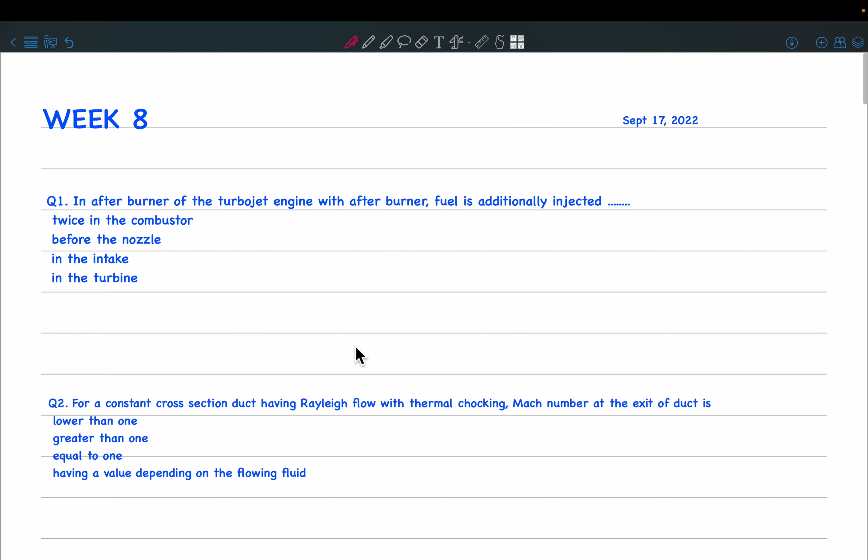The first question is on the afterburner in a turbojet engine. The fuel is additionally injected, but is it injected twice in the combustor, or before the nozzle, or in the intake, or in the turbine? So do you know where the afterburner is placed exactly in the turbojet engine?

So you must have seen the schematic of a turbojet engine. What is the first component? There is the air inlet, and before the compressor you have this diffuser, where the area is expanding, so that acts like a diffuser. Then this is the compressor, then you have a combustion chamber, and then you have a turbine. The turbine and compressor are connected to each other, so the turbine runs the compressor, and then you have a nozzle.

Now sometimes what we have before the nozzle is an afterburner, which is essentially a region where combustion occurs. So over here you will have an afterburner. The answer to this question is: before the nozzle.

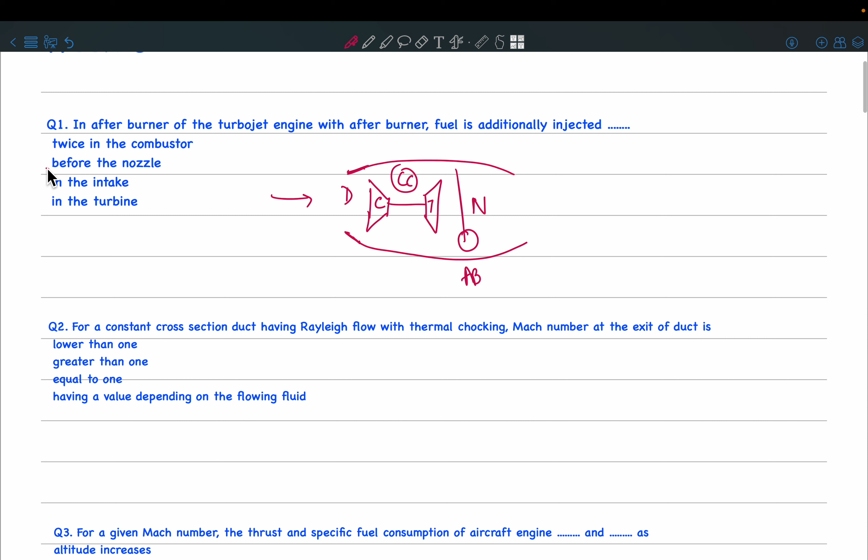So the next question is: for a constant cross section duct having Rayleigh flow with thermal choking, what is the Mach number at the exit of the duct? What is the key word here in the question? Choking. Last session we discussed what choking is. So what is the answer here?

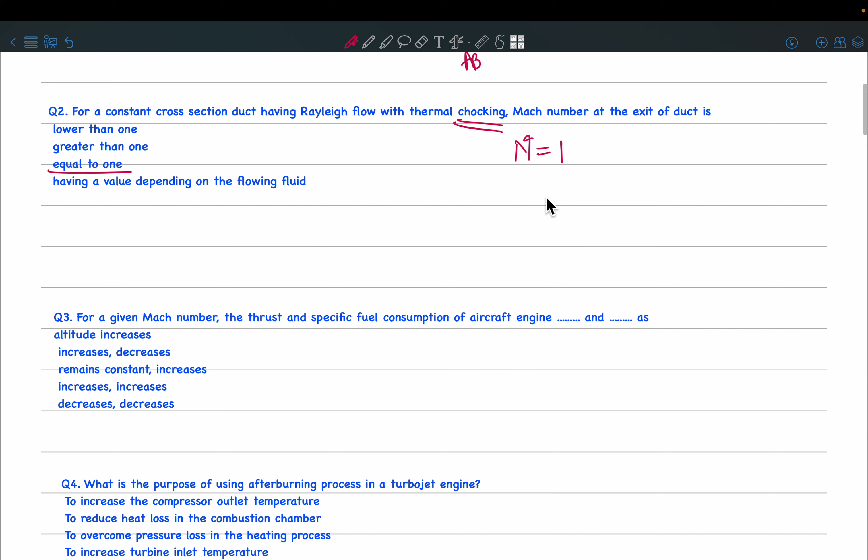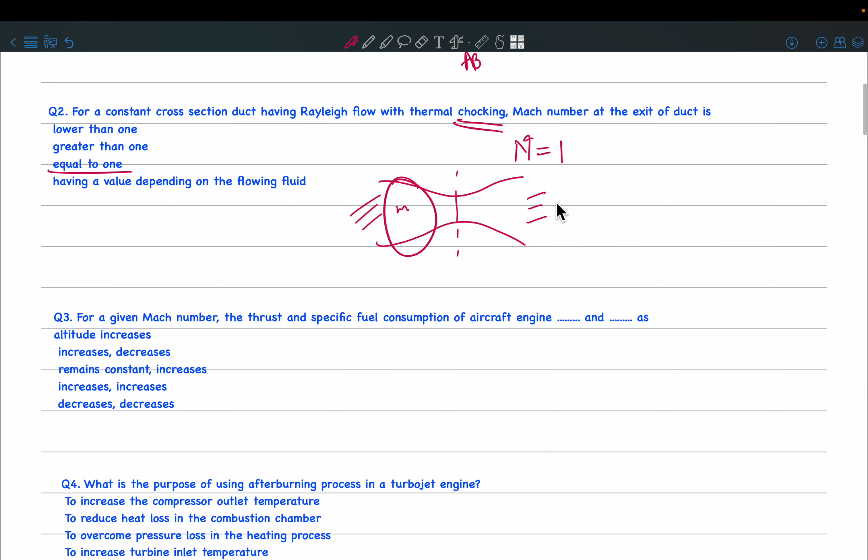Last time we discussed that choking is nothing but when the Mach number in the throat of a nozzle or in a duct reaches 1. So here the answer is equal to 1. And what happens when Mach number reaches 1? Say for example you have this nozzle and at the throat Mach 1 is achieved, then whatever changes you are making in the upstream flow will not reflect in the downstream flow. So even if you change the mass flow rate here, only the pressure in the upstream flow is going to change, but the pressure downstream will not change.

The next question is: for a given Mach number, does the thrust and specific fuel consumption of an aircraft engine increase or decrease with altitude? So there are two questions here, one regarding thrust and the other regarding specific fuel consumption. Remember we had this plot last time. This is your thrust, and on the x-axis you have altitude. Can you tell me how this is going to vary?

Am I still audible? Okay, so how is this going to vary?

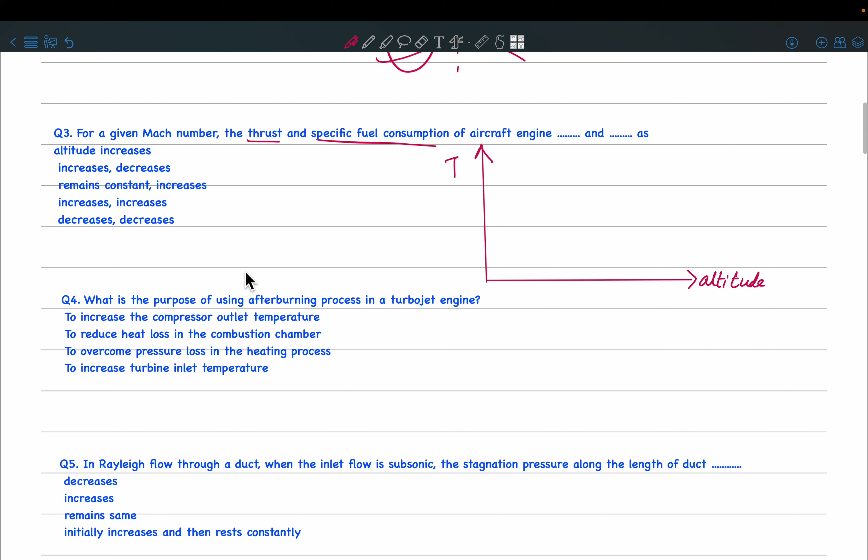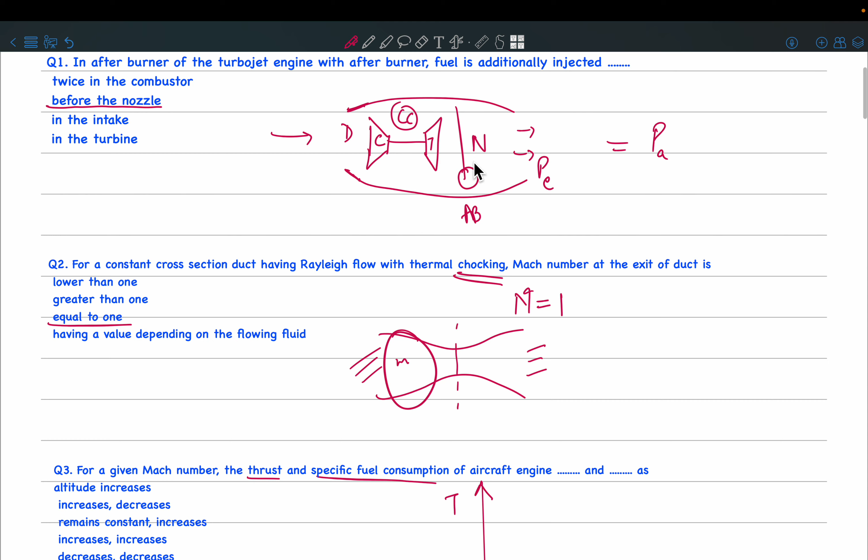So how is a turbojet supposed to function? It should ideally give you as much thrust as possible. Remember last time we discussed that the turbojet produces maximum thrust when the exit pressure PE equals the atmospheric pressure PA. If there is any difference between these two pressures, your turbojet is not functioning at full capacity. So what happens as you increase altitude? Say you designed your turbojet engine for sea level atmospheric pressure. Now as you increase the altitude, the atmospheric pressure reduces. So since you optimized for sea level, if you fly at higher altitudes, the thrust is simply going to decrease. Does that make sense?

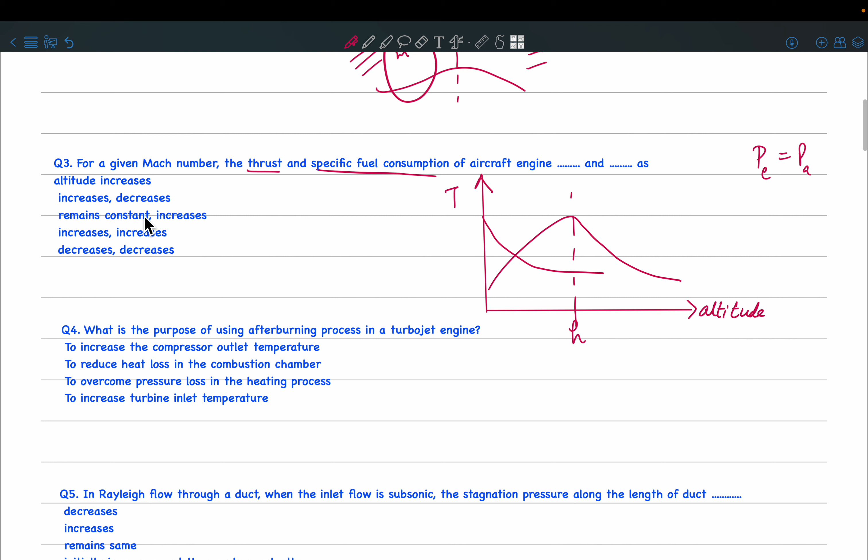So thrust is going to increase and then decrease, but the specific fuel consumption will keep decreasing. So the answer here is increases and decreases. This question is kind of ambiguous, so I would rather just explain this graph than give you any of these options, because the question needs to be more specific about where the aircraft is actually optimized for operation.

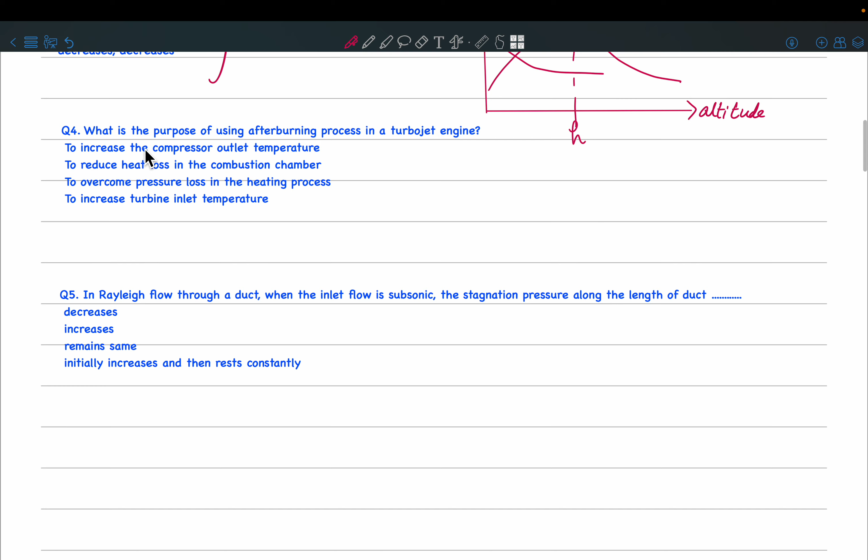Moving on to the next question: what is the purpose of using the afterburning process in a turbojet engine? Why do we use an afterburner? Like I said in the previous question, the afterburner is added just after the turbine and just before the nozzle. Now what is the work of a nozzle? What does the nozzle do?

It increases the kinetic energy, it decreases the pressure. So now if the nozzle has to increase the kinetic energy, how does it achieve that? We know that the velocity at the end of the nozzle actually depends on the turbine outlet temperature. So after the turbine, if you have very high temperature, then there will be a lot of thermal energy in the fluid, and that you can convert to kinetic energy, right?

But what happens in a turbine? If you go back to your turbojet cycle, in the compressor and in the combustion chamber the temperature is rising in the TS plot, but in the turbine there is a drop in the temperature, right? So what we do is we add an afterburner so that you can further increase the temperature to much higher values. As a result, the expansion in the nozzle will be much larger, and that will lead to much more increase in the kinetic energy.

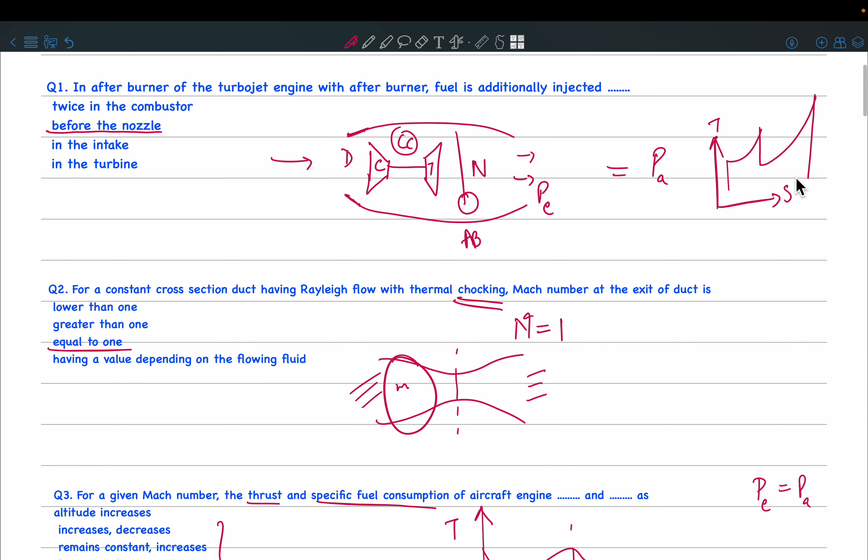So what is the answer over here? The purpose of using an afterburner is to increase the turbine inlet temperature. Is this clear?

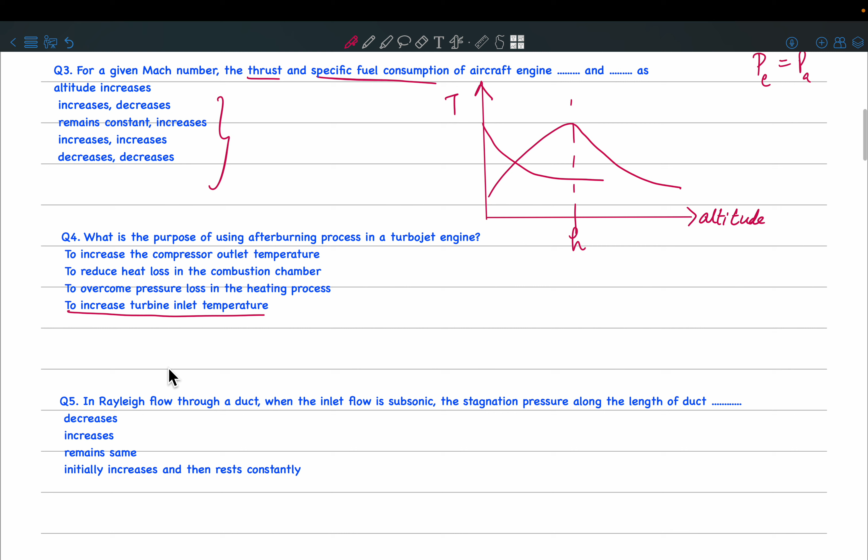Now in Rayleigh flow through a duct, when the inlet flow is subsonic, what happens to the stagnation pressure along the length of the duct? What is a Rayleigh flow?

You must have seen the lectures, right? So what is a Rayleigh flow? Do you know the SFEE equation, the energy conservation equation?

It's constant area, frictionless flow. What else? What else? Yes, exactly. So we assume that the duct is frictionless, and you can assume it to be constant area or variable area, but the main thing is we account for heat addition or heat rejection. This basically says, like in the combustion chamber, if you just assume that this combustor is like a duct where combustion is happening, so you are allowing for heat addition in your energy conservation equations.

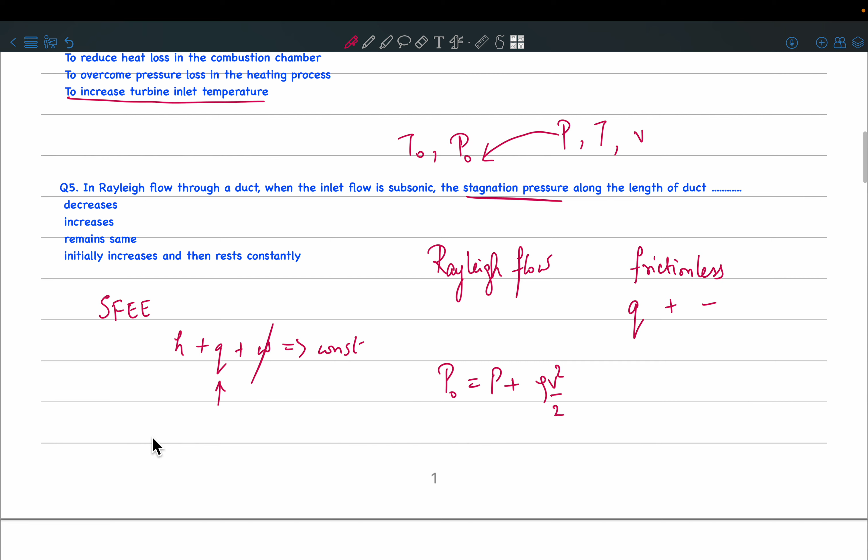So now the question is, how does the stagnation pressure change? Always remember that the stagnation pressure will change whenever there is any heat addition or whenever there are losses due to friction. If you remember, let me just add a page over here.

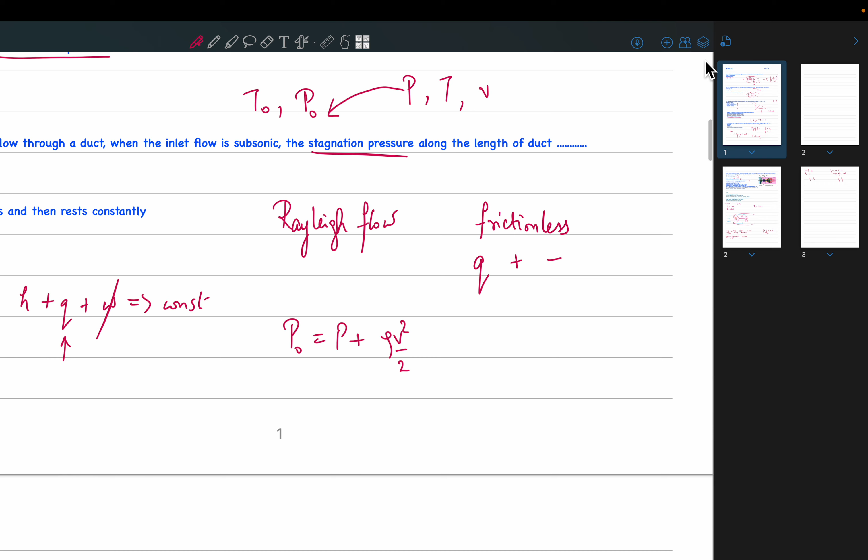If you remember the TS diagram of your turbojet engine again, what we draw here in the TS diagram, we draw these constant pressure lines, isn't it? But these are constant static pressure lines. So you start, this is say P1 and this is your P2. In the compressor, your static pressure increases like this, and then in the combustion chamber it remains at P2 because you assume constant pressure heat addition, and then in the turbine again there is going to be a decrease in the static pressure.

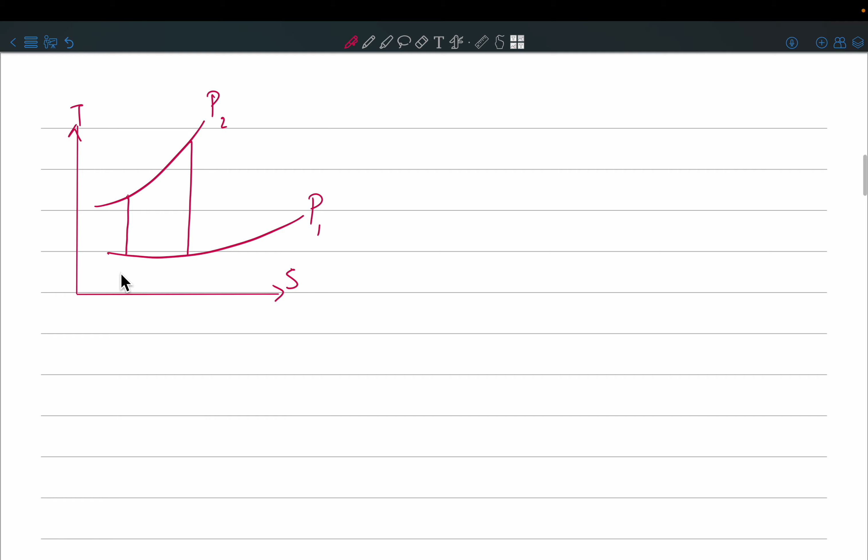And then before the compressor you essentially have a diffuser. In the diffuser also we say that the static pressure is increasing, and in the nozzle we have the static pressure decreasing, right? But now if I ask you what happens to the...

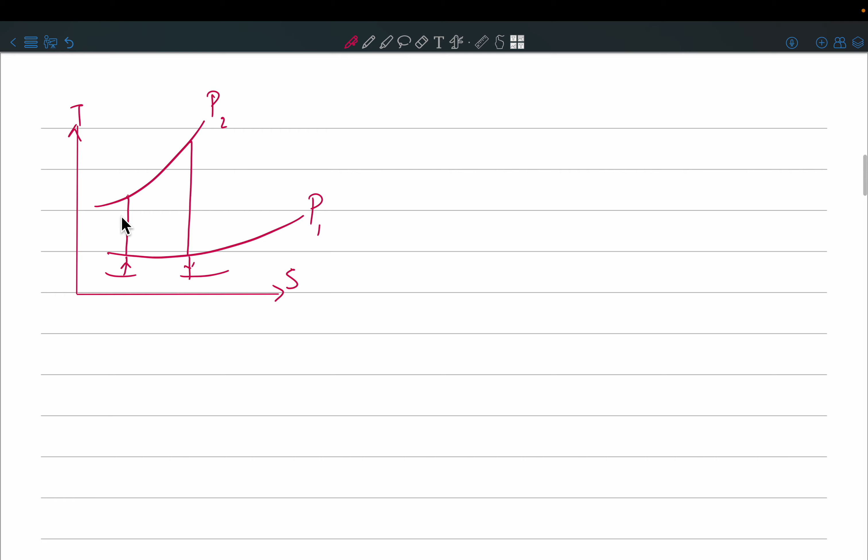Stagnation pressure, so if for example I drew this TS diagram, but instead of drawing the constant pressure lines, if I draw the constant stagnation pressure lines, can you tell me what is going to happen? Say this is the stagnation pressure P naught 1. I have started from atmospheric pressure, which is essentially the stagnation pressure. What happens in the diffuser? How does the stagnation pressure change?

It is almost constant, it remains the same, because in the diffuser you don't have any work added, there's no turbo machinery over there, and of course we are assuming there's no heat loss or anything, so the stagnation pressure is going to remain the same.

So let me number this for reference. Let us say there was this inlet, after inlet up to the inlet of compressor it is 1, then you have 2, then this is 3, 4, and exit. Here inlet and 1 are essentially the same point, because I have considered the stagnation pressure lines over here. What happens if I go from 1 to 2?

Will the stagnation pressure jump or will it remain same in a compressor? So what are you doing in a compressor? We are doing work and there is turbo machinery involved, right? So you are adding work to the fluid, so the stagnation pressure is going to increase. Is that clear?

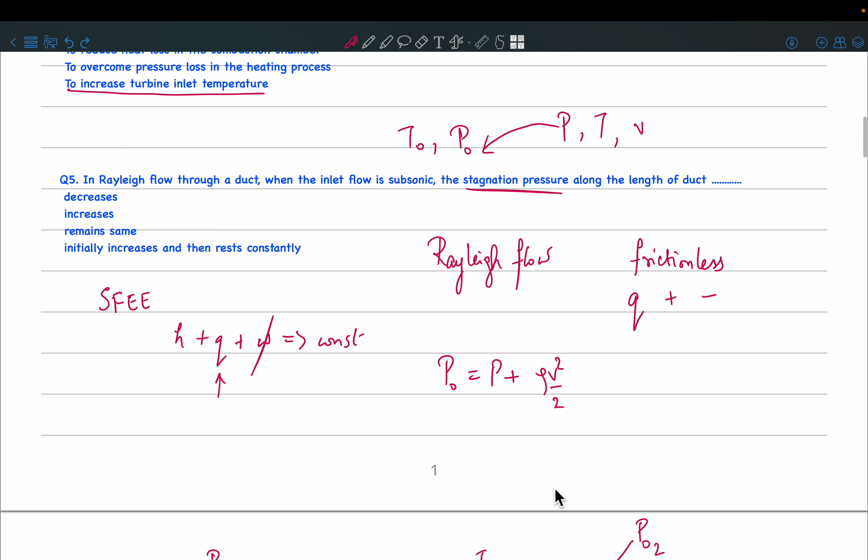Stagnation temperature increases. So what? Why will the stagnation pressure decrease? Mach number increases. In a combustion chamber, we assume almost constant velocity. Isn't it?

Then why would the stagnation pressure change in Rayleigh flow? So you are adding heat, okay, but understand that in the combustion chamber or in a simple duct, if you are adding heat, you are changing the temperature conditions. You are adding energy which goes in raising the temperature. So your stagnation temperature will increase, but you will have losses, and that is why the stagnation pressure is supposed to decrease.

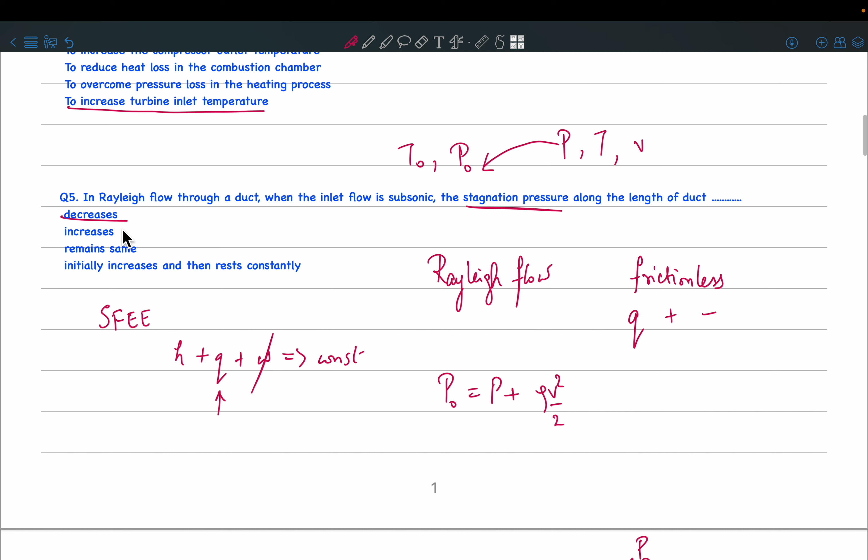So this is actually not intuitive, because you will say that I am adding heat, so if I am adding heat, the energy should increase, so the stagnation pressure should have increased. But instead what you see is that the stagnation pressure is going to decrease. Is this clear? Where does the heat that you have added go? It goes in increasing the stagnation temperature.

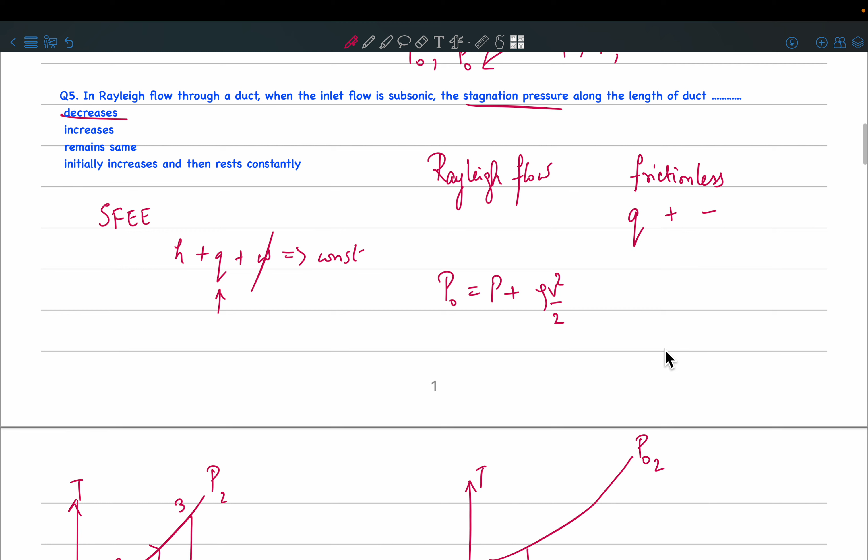Is that clear? Should I move on? Okay.

Okay, so now we'll move on to the big numerical for today. So here I have a twin spool turbo fan engine, for which the parameters are given, that is the bypass ratio and overall pressure ratio, everything is given to you. In this fan, the fan is driven by a low pressure turbine, the compressor is driven by a high pressure turbine.

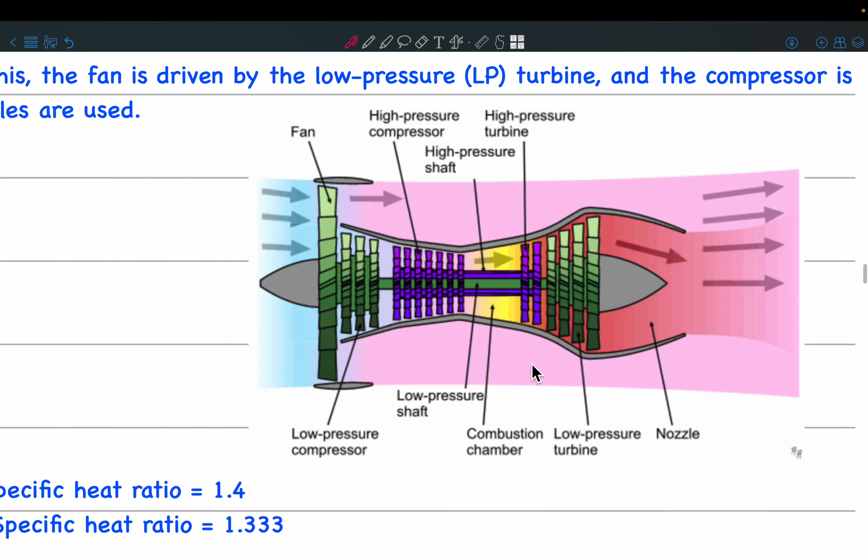Okay, so now what are we given? We are given the overall pressure ratio, fan pressure ratio, bypass ratio, and the maximum temperature that is achieved, that is the turbine inlet temperature, which is essentially defined by the material of your aircraft, right? So you are also given the polytropic efficiency, isentropic efficiency for all the components, and mechanical efficiency of the spool.

So what is mechanical efficiency? Now while transferring the work from the turbine to the compressor, the efficiency of the spool is going to come into play. So this is nothing but the transmission efficiency. Okay, yeah, any questions?

Okay, so combustion pressure loss - here we are assuming that some amount of pressure is lost in the combustion chamber, and then total air mass flow is given to you, fuel air ratio is given to you. Now what is total air mass flow?

Remember, in a turbofan engine, you are going to take in some air. Some of that air will simply flow from the outside, that is as a cold flow, and some of it will pass through the core of the engine, and that will come out as a hot flow. So we have a cold flow over here, m dot c, and over here we have a hot flow, m dot h, which is going through this entire core. And what is given to you is the total air mass flow rate that you are taking in over here, so this is m dot total which is given.

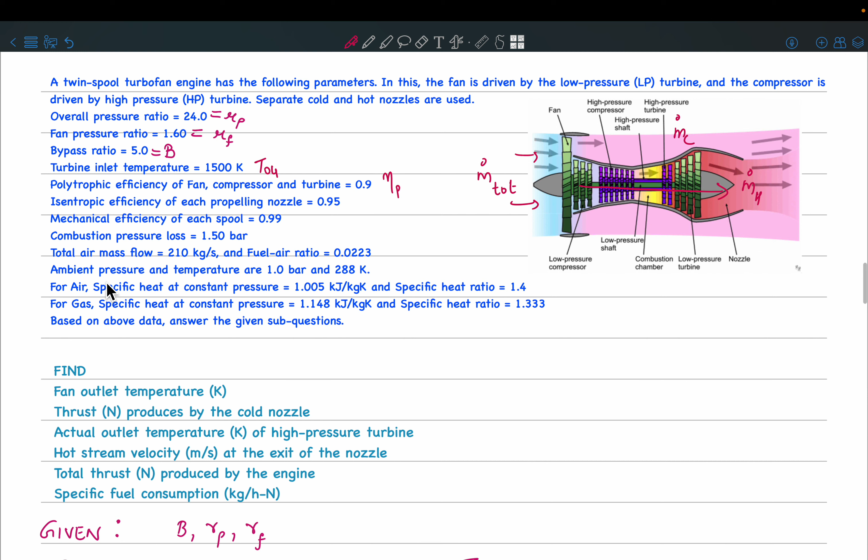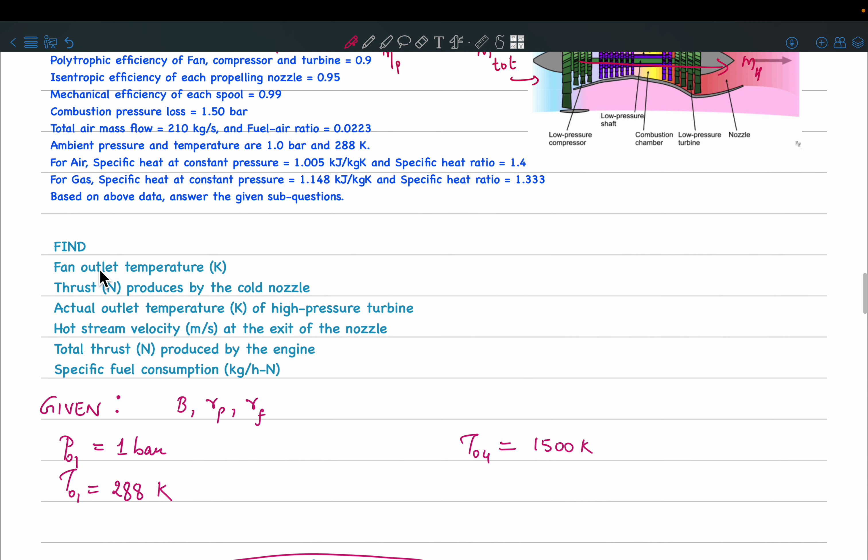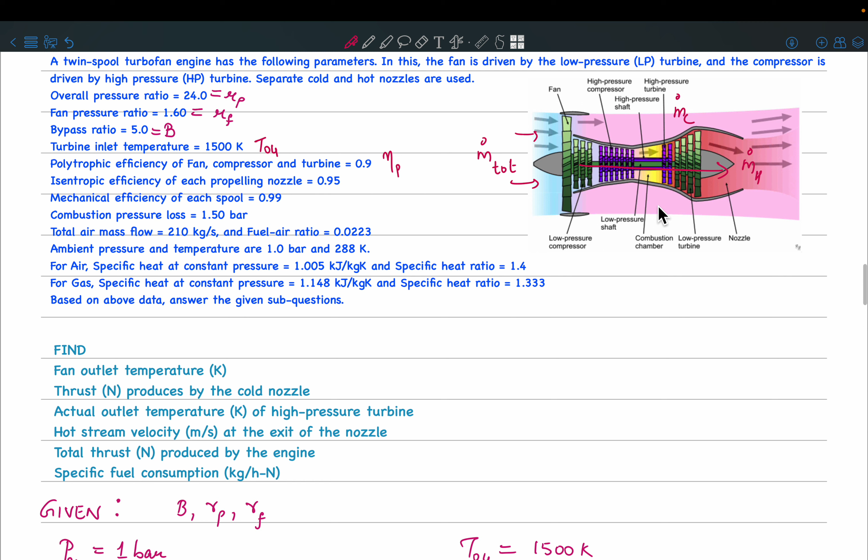Okay, then the ambient pressure and temperature are given, and so Cp and gamma for air and gas are given. So now we are asked to find certain quantities like thrust and the fan outlet temperature and so on. So what we have to do is basically solve the entire cycle for this turbofan engine. Okay, so yeah, I've just made a schematic here, as you can see.

So there is cold flow m dot c and a hot flow m dot h. I hope this much is very clear. What is the bypass ratio definition? What is bypass ratio defined as?

Yes, that's right. Okay, and usually this turns out to be, in practical turbofan engine, it is in the range of 8 to 12. Okay, so here what we are given, bypass ratio is 5. So this is a small turbofan engine, in some sense.

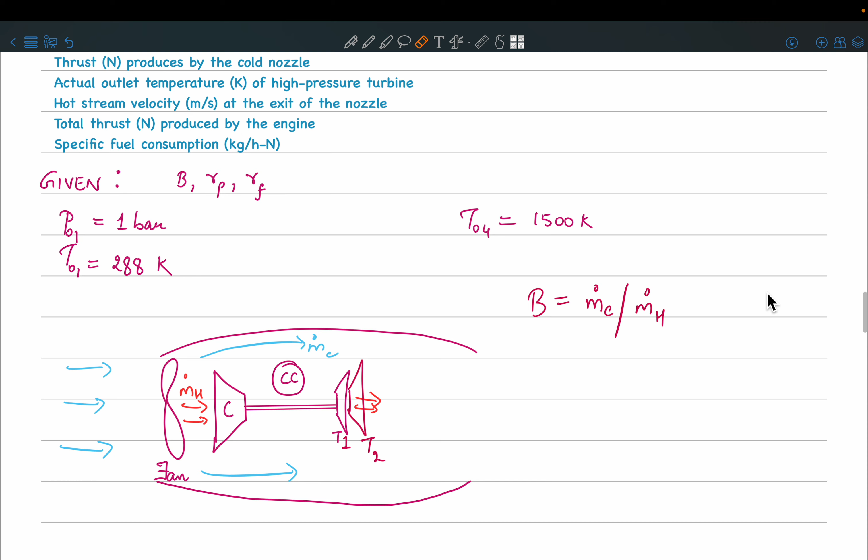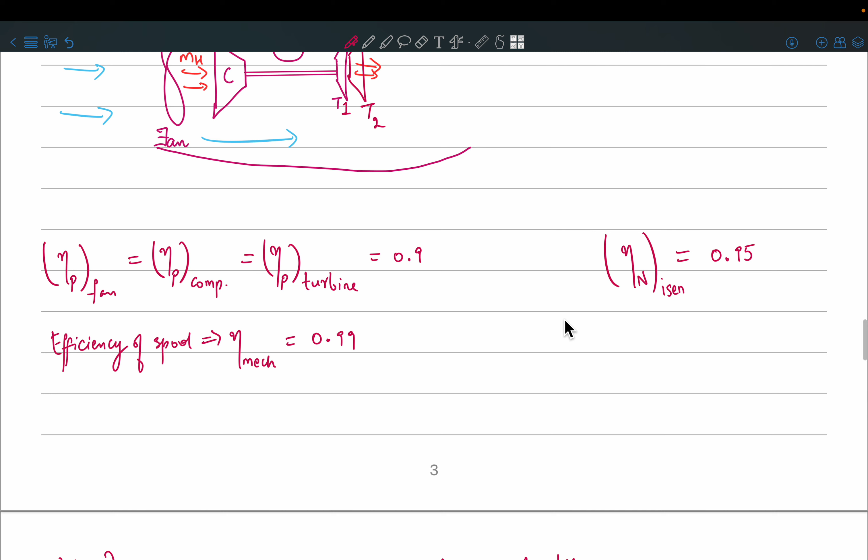Okay, so again I have written these quantities, that is the polytropic efficiency of the fan, compressor and turbine is given, isentropic efficiency of the nozzle is given, and the efficiency of the spool is given. Now we are given two different things, Cpa and gamma A, that is the specific heat and the gamma value for air, and similarly for gas.

So in the cold flow, the inlet is essentially just air and the cold flow is just air, so for the cold flow we will use the air values. And in the hot flow, till the fluid moves through the compressor, it is just air, but in the combustion chamber we add fuel, right? So only after the fluid has come out of the combustion chamber, that is in the turbine and the nozzle, we will use the values for Cp and gamma for the gas. So where to use Cp air and where to use Cp gas, is this part clear?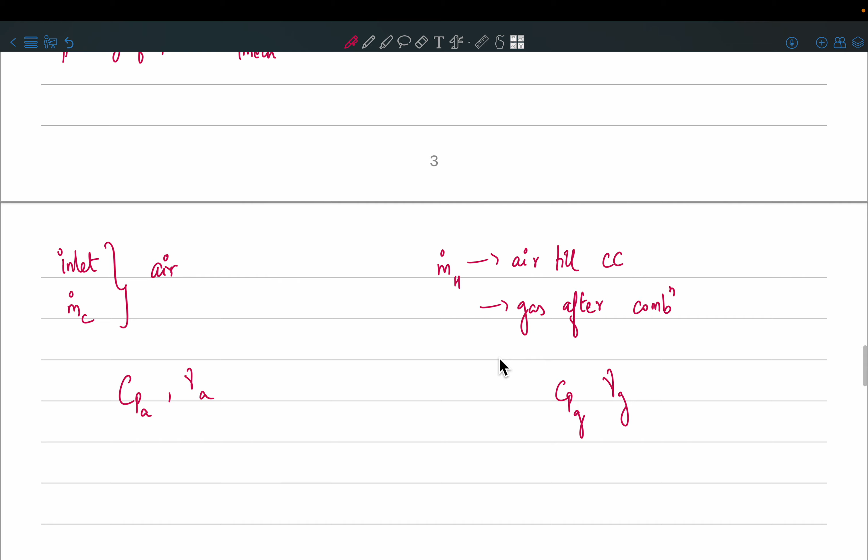So for compression, what is the equation for relating the compressor efficiency and the polytropic efficiency? This you must have seen in the lecture actually. I'll just write down the equation - if there's any doubt about the derivation, you can let me know, I'll clear it in the next session. Okay, so this is for a compressor.

You have eta c minus 1 by eta c, essentially 1 by eta poly, so eta p of the compressor, into gamma minus 1 by gamma. Okay, so if you just plug in the values here, which gamma will you use? Because we are dealing with the compressor, it has to be gamma air. So this is, so you are given the polytropic efficiency, right? So this turns out to be 0.31746. So this definition I hope you all are aware of.

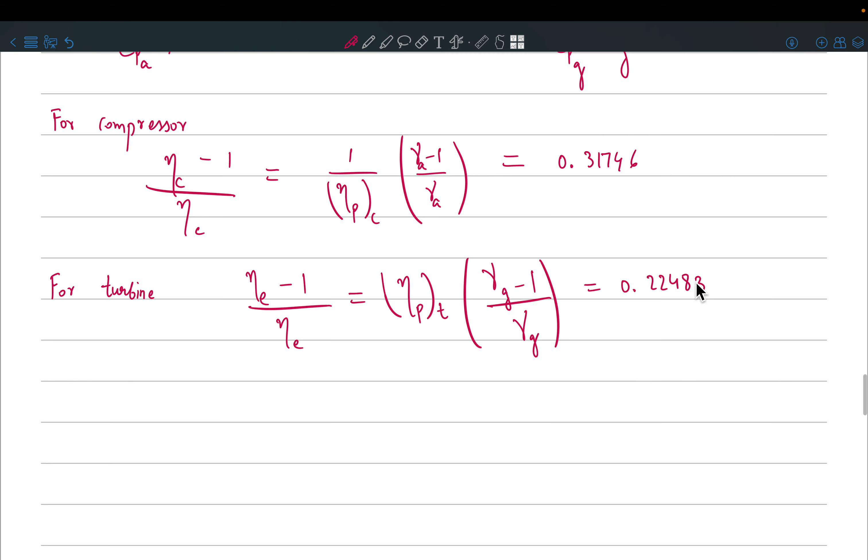Okay, then the next thing is, if I just draw the TS diagram again, I'm going to use the isobaric lines where I have the constant pressure, static pressure. Okay, so how will the flow look on this TS diagram if I consider only the flow across the fan? Okay, so you have the inlet to the fan. So basically I am drawing the TS diagram for the cold flow, that's all. So you start from this PATM. So help me out with this diagram, come on. What will the fan do? Will the pressure, static pressure increase?

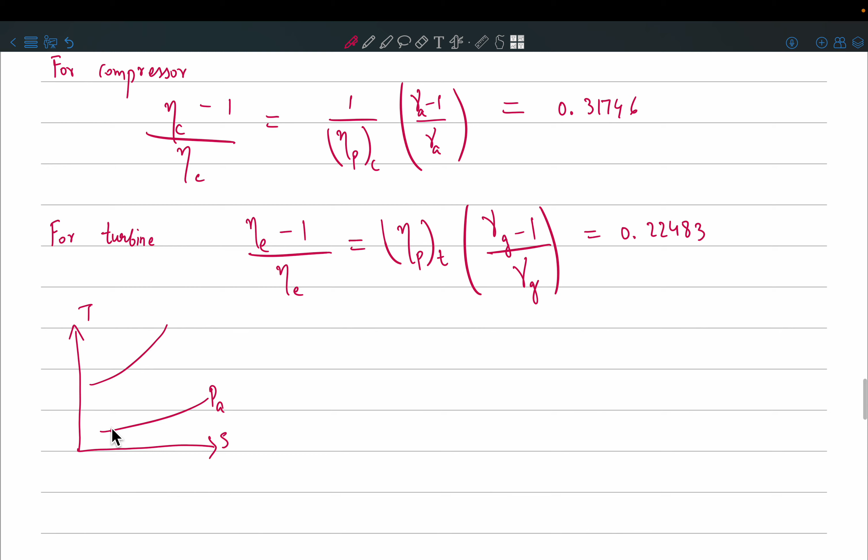Static pressure is going to increase over here. Okay, go back to the diagram. You have this cold flow, and it doesn't have to go through any turbo machinery, but remember it is going to come out of the nozzle. So the cold flow also has a nozzle over here. This is the cold flow going, and this part you can assume is like a nozzle.

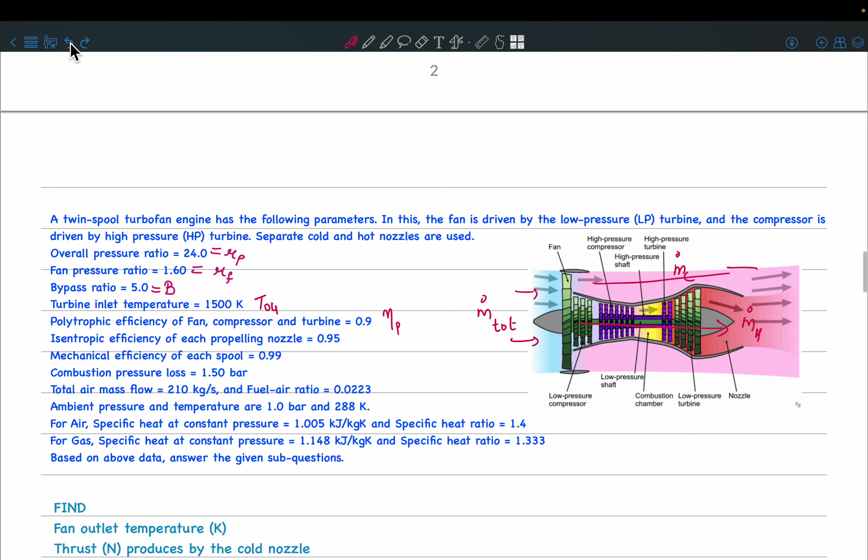So now maybe you can tell on the TS diagram. This was from the inlet, and then you went across the fan, then from the fan into the nozzle. Now how will that affect the TS flow? You are going to expand into the atmosphere, and since you didn't undergo any combustion, there is no change in temperature. So simply you will draw a line right on top of this coming down back. That is the exit. So this is essentially what we have to calculate.

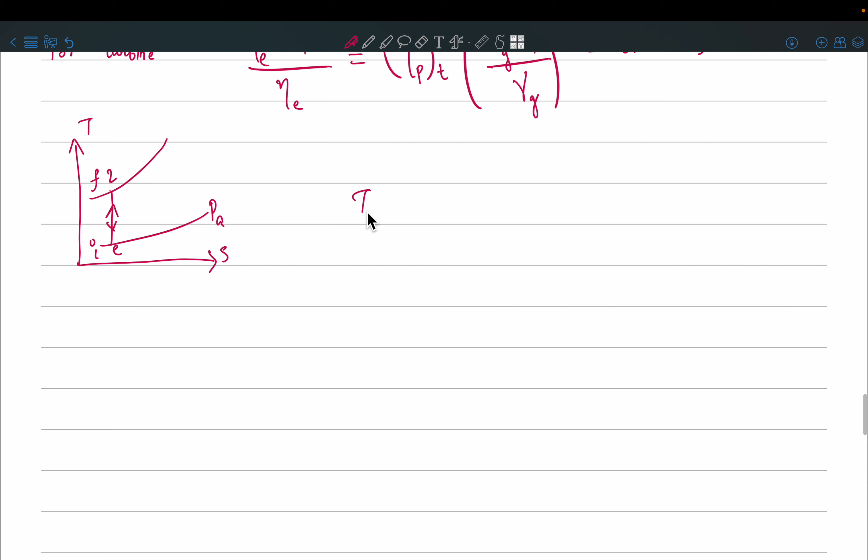So first, from the inlet across the fan, we have to calculate the temperature. I can call this state 2. So what is the outlet temperature after the fan? How can we find that? We can use isentropic relations. So T naught 2 by T naught 1 is equal to P naught 2 by P naught 1, whole to the power of gamma minus 1 by gamma. Is this clear?

And this pressure ratio is going to be the fan ratio which is given to you. So you can find the T naught 2 temperature and tell me. T naught 1 is known, so please just calculate and tell me the value. Okay, so the answer I've got is 334.34 Kelvin. Yeah, pretty close.

Okay, then the next thing we have to calculate is P naught 2. So we have T naught 2 to calculate P naught 2, which obviously you know because P naught 1 is given and you know the fan ratio. So P naught 2 by P naught 1 is 1.6 and P naught 1 is 1 bar. So of course P naught 2 is 1.6 bar.

Now why do we need to check this P naught 2 value? Remember, if the nozzle is choked or whether the exit pressure is more than or less than the atmospheric pressure, that is going to basically define whether there is choking or not. So we have to check if this pressure ratio is more than or less than the critical pressure ratio, so we have to compare it with P naught 2 by P naught 1 critical. Last time we discussed what is the definition of P naught 2 by P naught 1 critical. That will depend on, what does it depend on? What are the main parameters that define your critical pressure ratio?

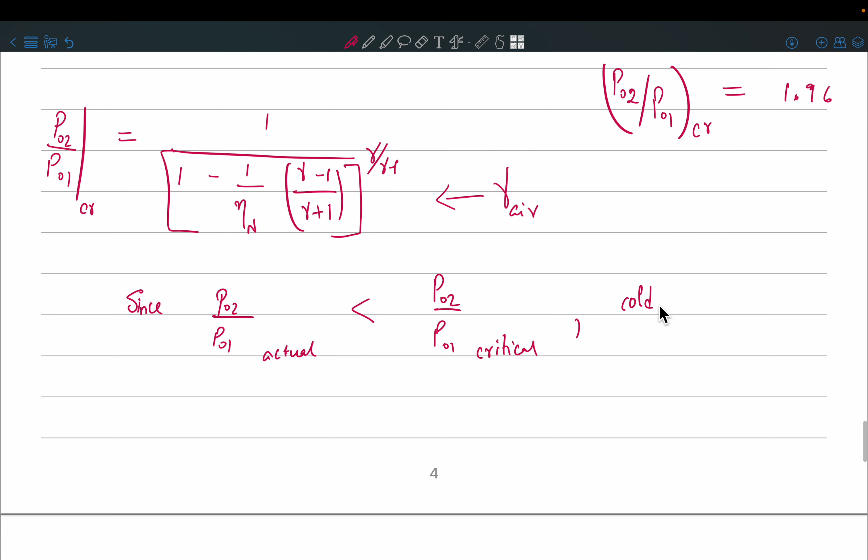So I'll just write that down here. Since P naught 2 by P naught 1 actual is less than P naught 2 by P naught 1 critical, we can say that the cold flow nozzle is not choked.

Then let us next solve for the nozzle temperature drop. So what is the temperature drop in the nozzle? I hope this is clear. There will be a temperature drop in the nozzle, so that is very clear in the TS diagram. So you are going to come from 2 to E. So let us see in the nozzle what happens.

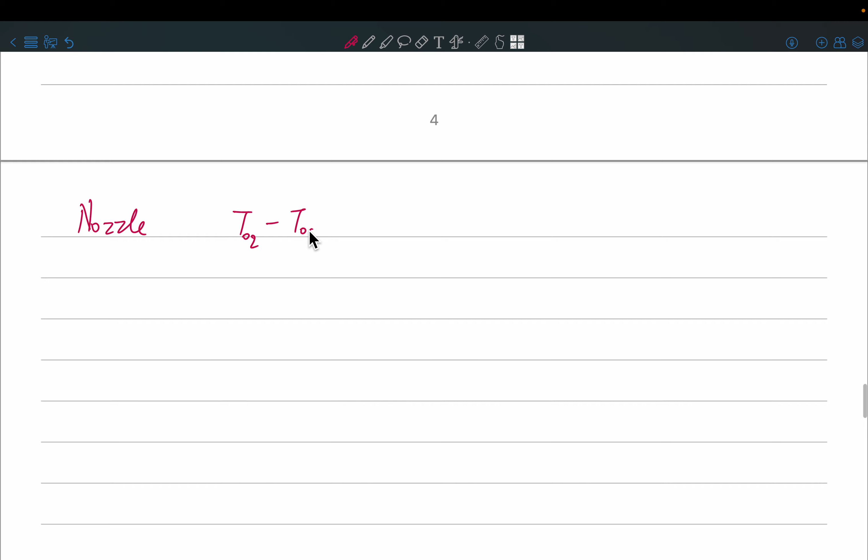The stations can be demarcated once, just for clarity. So let us say this is 2 and the exit is basically, I'm numbering it as 8, or you can just call it E, exit. So for the nozzle, the temperature drop is going to be T02 minus T08, sorry, T8. So how, before I give the answer, how are we going to get this value T8? We just have to get the temperature at the exit of the nozzle. So how do you get that?

Yeah, come on, we've done this several times. By isentropic relation, what will we get? We know that P02 by P01, right? So from there you get T02 by T01, that is the isentropic relation you have used. So now what can you do? How are you going to get T8? What happens to the stagnation temperature in the nozzle? That is the first question.

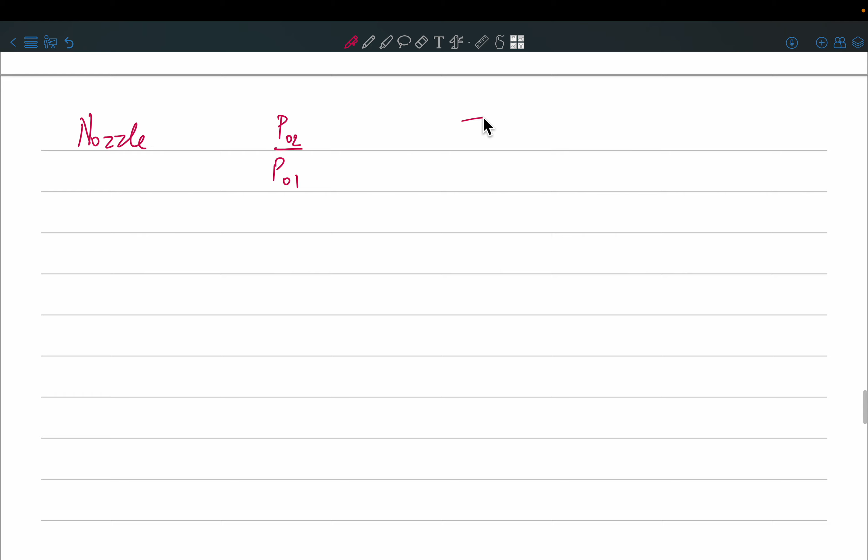What happens to stagnation temperature? Can I say T02 is equal to T0E? Can I say this? So in a nozzle you are not having any turbo machinery again, so the stagnation pressure and the stagnation temperature will remain the same, right?

Okay, so we are going to use the definition of nozzle efficiency. How is nozzle efficiency defined? What is the definition of nozzle efficiency? You remember that if you are coming, this is your real path, but ideally you should have come isentropically. So you will say actual temperature drop by ideal temperature drop. That's how you define nozzle efficiency, right?

I'll just write over here, actual delta T by ideal delta T. So basically using this definition I can get T02 minus T8 is equal to eta nozzle into T02, 1 minus T01 by T02. So that further you can get from the pressure ratio because you know it. So that is going to be 1 by the pressure ratio of the fan to the power gamma minus 1 by gamma, and gamma you will use for air, so this is gamma air.

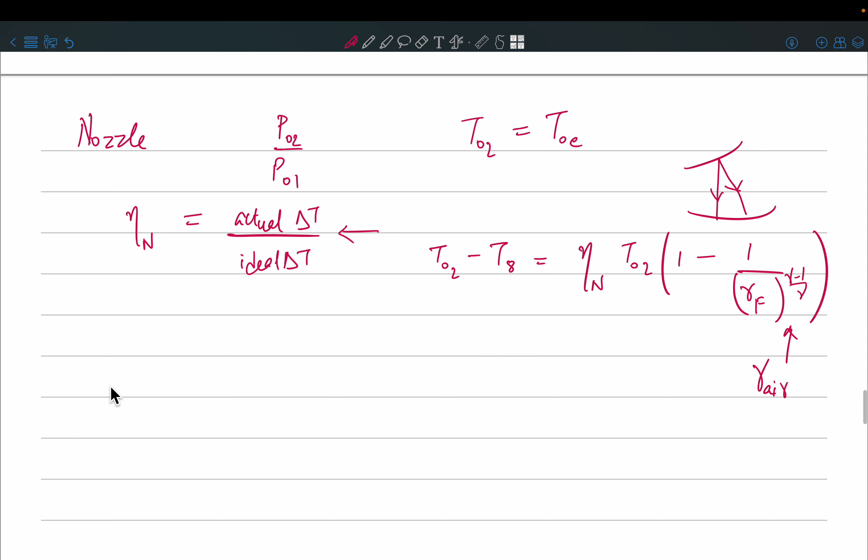Okay, now using this simple relation you will get the value of T8. Did you understand what we have done over here? We have just used the nozzle efficiency, and then the temperature ratio we have got from the pressure ratio. So the value of T8, can you evaluate and tell me the value of T8?

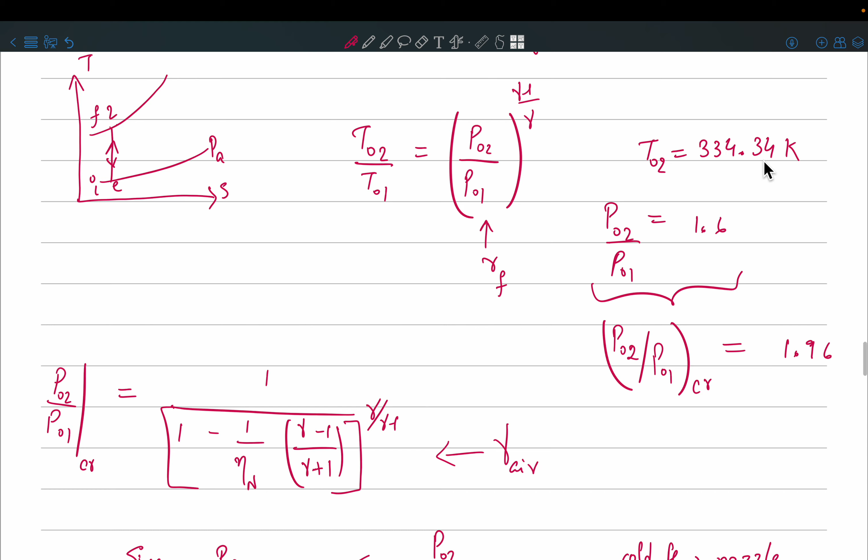So first you can evaluate T02 minus T8, that turns out to be 39.91 Kelvin. T02 was known to us, which is 334.34 Kelvin. So you can get T8 is 334.34 minus 39.9. Am I still audible? One of you just give me the values. Okay, 294.4. Okay, thank you.

Okay, so now what is the next step? Once we know the temperatures, we can find the velocity, because remember we have to find the thrust produced by the cold nozzle and the thrust produced by the hot nozzle. So for that we need the velocity of the cold nozzle, that is the flow coming out of the cold nozzle. We have to calculate that velocity. So let us denote that cold flow exit velocity as C8.

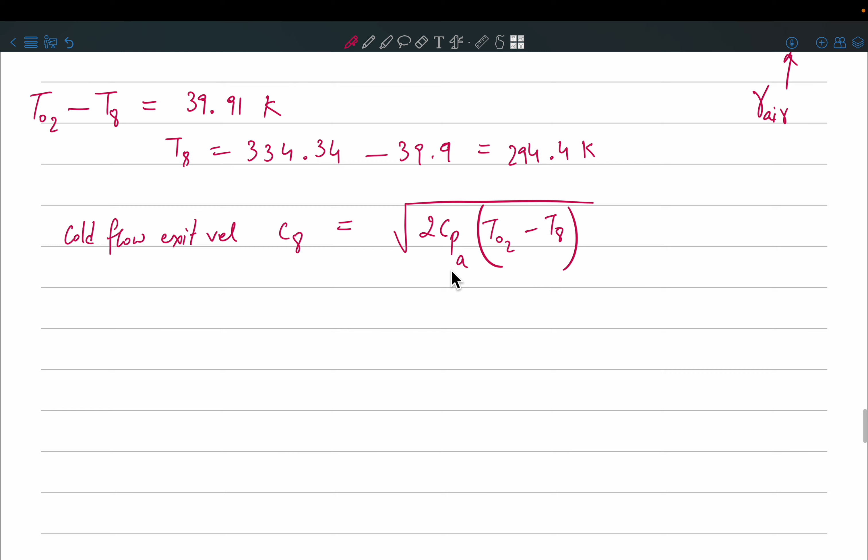So C8 is nothing but 2 Cp delta T across the nozzle, which is T02 minus T8, which we have evaluated above, under the root of this. Now what is Cp over here? Cp again is Cp air, because this is just the cold flow. So what is the velocity that you are getting? Are you guys doing the calculation? Yeah, 283.24. Okay, this is the value I have here.

Okay, and then you can calculate the mass flow rate. Remember, we have been given m dot total, and the bypass ratio was given. So you can find out m dot c. So m dot c is nothing but m dot total into b by b plus 1, right? And this turns out to be 175 kg per second.

Okay, so now it is very easy to calculate the thrust due to the cold flow. I'll denote this as T cold. So what is thrust due to the cold flow? What is the expression? Yeah, m dot c into C8, basically it's m dot UE, right? So what is the value in newtons? You can give me the value in newtons. You just have to multiply these two things. So yeah, it's 49567 newtons. Okay, so we have completely solved the cold flow.

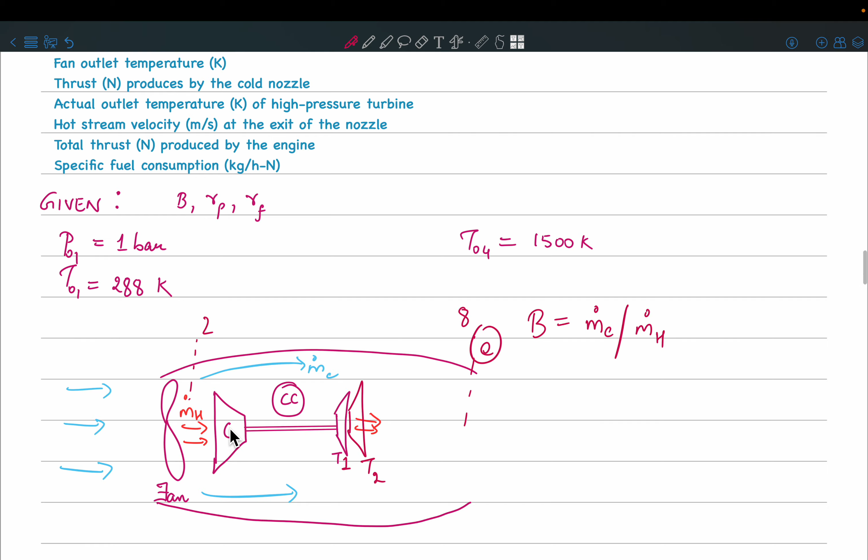Now what is the next task? We have to solve it for the hot flow, that is the flow through the core, going through your compressor and the high pressure turbine, combustion chamber and all that. Okay, so maybe I'll just change the color here so that it's clear.

Okay, so let's now do the calculations for... audio fine? Are you getting fine audio? I just lost connection.

Okay, let us do the calculation for the hot flow now. I'll just write that here.

So we are given the overall pressure ratio, and we are also given the fan pressure ratio. Overall pressure ratio is nothing but fan pressure ratio multiplied to the compressor pressure ratio. So we can find the compressor pressure ratio from here, which is P03 by P02.

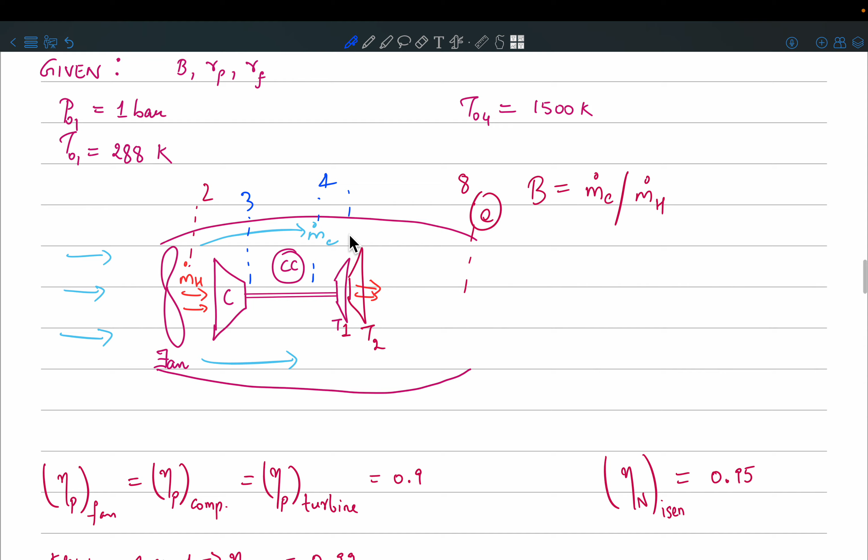So what is 3 and 2? Come back here. This is now just after the compressor would be state 3, combustion chamber over here is state 4, and then after the turbine would be 5.

Compressor pressure ratio is what? What is the value? 50. That's it.

Okay, then we can find T03. So we can just simply use the isentropic relations, right? That is T03 by T02 is equal to P03 by P02 to the power gamma minus 1 by gamma. What gamma will be used here?

Now we are in the hot flow. So what gamma will be used here? No, you'll not use gamma of gas. Why will you use gamma of gas? So you should use, we have only reached compressor, right?

Still you have not added the fuel, so you should use gamma air over here. So just be very careful while doing this. You should see at what stage you have reached. Okay.

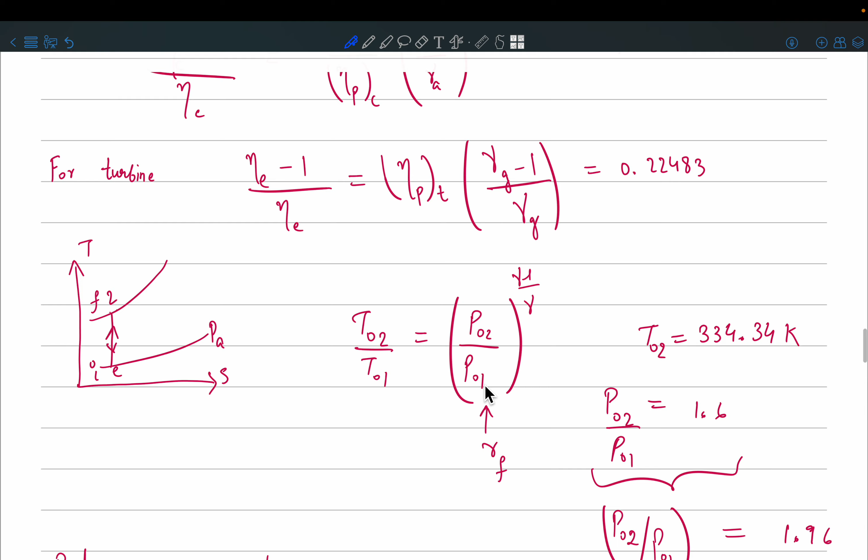Now, if you remember, we evaluated these exponents, eta c minus 1 by eta c, eta e minus 1 by eta e. So ideally we should be using these values, because what is given in our pressure ratio, we should raise that to the power... here instead of gamma we should be using this value.

Because now we are having this twin spool configuration, right? And what is given to you is the polytropic efficiency, so that you have to incorporate in your equations. So I hope this part is clear from the lectures.

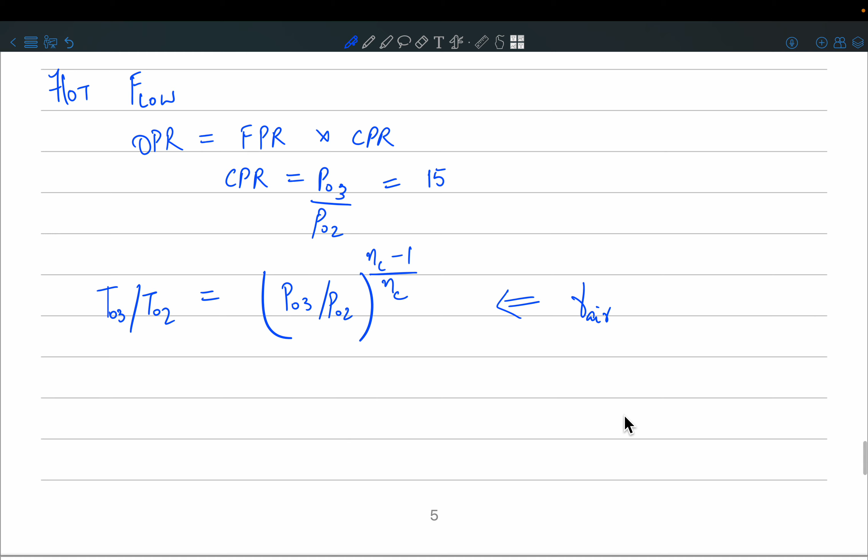Okay, so now you have the value of this eta c, and you also have the pressure ratios. While calculating this eta c also, remember we have used gamma air and not gamma gas. This is very important. So now you can find the outlet temperature of the compressor, that is T03.

Can you tell what is T03? T02 will be the same what you found in the cold flow, right? Yeah, it's okay. I have 789.86, so that's approximately 790.

Okay, so that's T03. And then in the turbine, remember ideally we should have P03 is equal to P04, but in the combustion chamber we said there is some pressure loss, so this is ideally, but there is some pressure loss, so that is given as delta P, which is nothing but P03 minus P04 by P03, right?

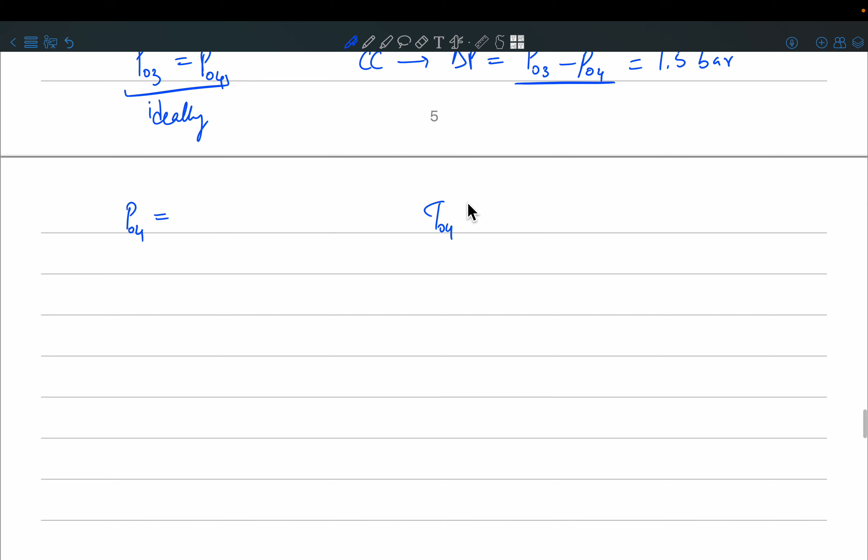So what is P04 value? And T04, if you remember, is already given to us. What is P04? T04 is 1500, but what is P04? You can just evaluate it.

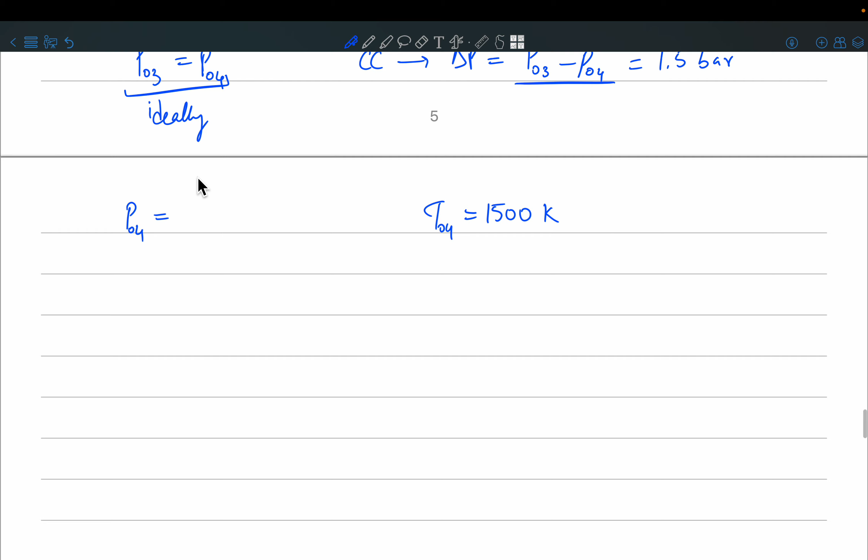What is P04? Anyone else can answer? Yeah, 22.5 bar.

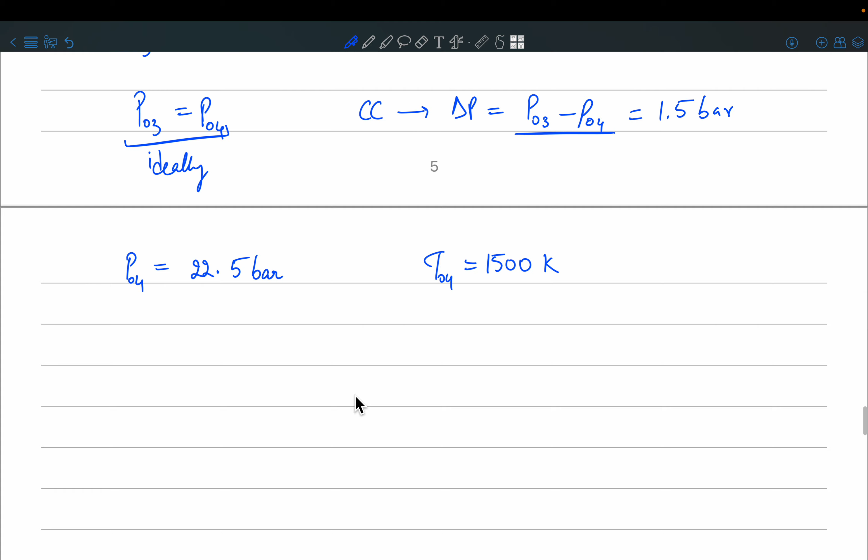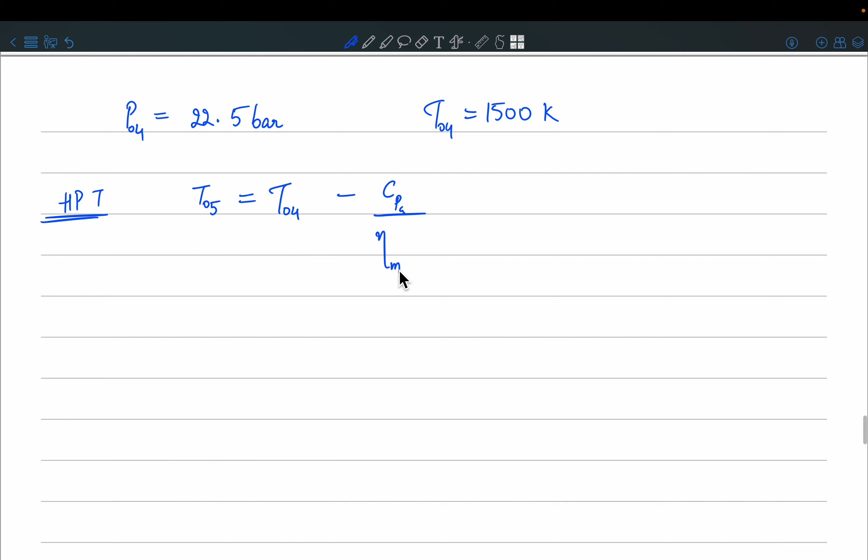Okay, then we can find the temperature at the outlet of the high pressure turbine. So let us now do the calculation for high pressure turbine, where the outlet is station 5. So I can write T05 is equal to T04 minus, this is Cp air by eta mechanical, or you can say eta spool. So here we have denoted as eta mechanical, Cp gas into T03 minus T02, right?

So how did we get this expression? Before you solve it, how did you actually get this expression?

Right, so work of the high pressure turbine multiplied to the transmission efficiency, which is nothing but your eta mechanical, should be equal to the work of the compressor, right? And what is work of the compressor? It is, see, in compressor it was air, so you have Cp air into T03 minus T02, okay, and here you have eta mechanical multiplied to, now in the turbine you have the gas, because combustion has already happened, so you will have Cp gas, and that multiplied to basically T04 minus T05. Okay, so if you just rearrange this, you will get that equation above.

Okay, so what is the value of T05? Okay, yeah, so that's right.

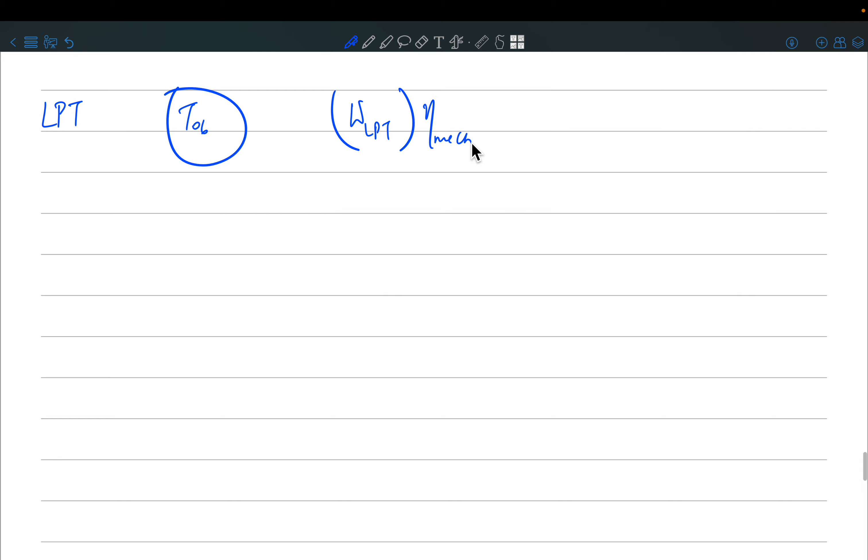I can just evaluate the work of the low pressure turbine multiplied with eta mechanical, and this will be - what will this give? So what does the low pressure turbine do? Yeah, right, it is the work that the fan requires.

Okay, so if you just do this calculation, and for work of the fan we have calculated all the things in the cold flow, if you just put in the expression and rearrange a little bit, you will get this: T06 is nothing but T05 minus the bypass ratio plus 1. Remember that, okay, maybe I should go step by step.

Okay, so what is the work of the low pressure turbine now? Cp gas multiplied to the temperature difference, T05 minus T06, and again you have eta mechanical - but how much air is going through this? M dot H.

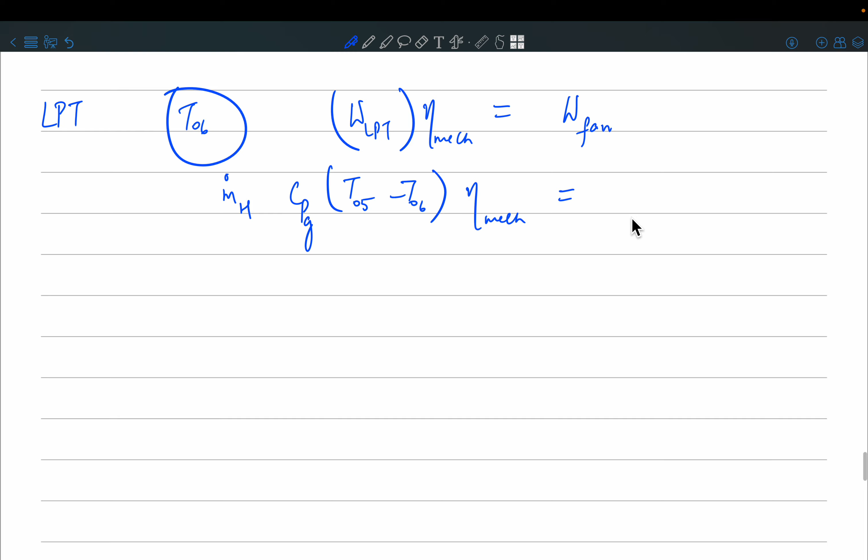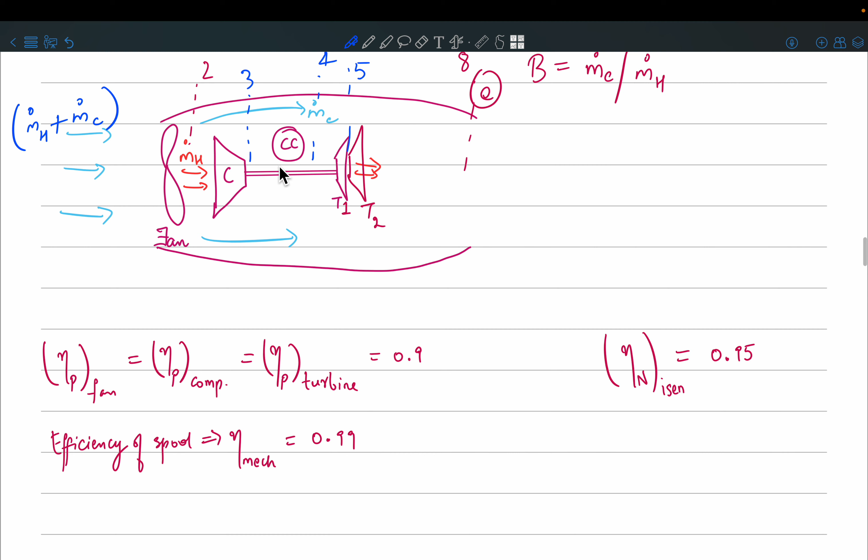And what amount of air is going through the fan? Is it M dot C? Yeah, it is total. So you should see very carefully what is happening here. After the fan there is M dot C and M dot H separate, but what is coming in is M dot H plus M dot C, and this whole total mass flow is going to go across the fan. So the fan is going to do work on the total inlet mass flow rate.

So that's why on the right hand side you are going to have M dot H plus M dot C, multiplied to Cp air into T02 minus T01. So you can just plug in the values and get the value of T06.

Since we are running out of time, I will give you the values, and I would request you to do the calculation after the class and verify if you get the same answer or not. So T06 turns out to be 851.33 Kelvin.

Yeah, okay, you've got it, great. And then how will you evaluate the outlet pressure across the low pressure turbine? So again you will use the same technique.

P06 by P05 is equal to T06 by T05 to the power of eta t by eta t minus 1. Okay, so now you have T06, T05, and you have P05, so you can find P06, and P06 turns out to be 1.811 bar. Is this okay?

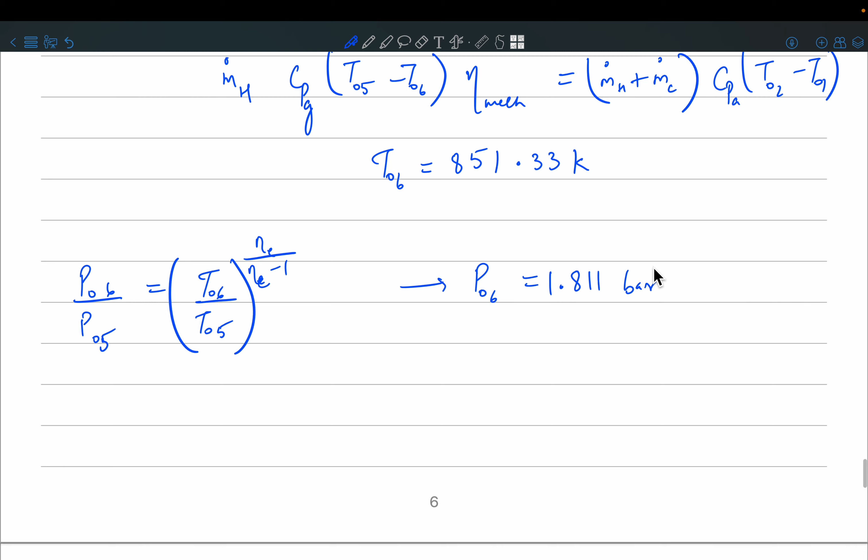Yeah, okay. So now we have the pressure ratio for the hot nozzle, right? For the hot nozzle, that is the nozzle through which the hot flow is going, we have the pressure ratio actual, which is P06 by ambient pressure, right? So we are going to expand to the ambient pressure. So the actual pressure ratio turns out to be 1.811.

Okay, now we have to evaluate what is the critical pressure ratio. Why do we need to evaluate this? To check if there is any choking, right? So for the critical condition, again we have that same equation: 1 divided by 1 minus 1 by eta nozzle isentropic efficiency, gamma minus 1 by gamma plus 1, and this whole raised to the power of gamma by gamma minus 1.

Now tell me, what gamma will you use over here? So when we were doing it for the cold nozzle, we used gamma air, but for the hot nozzle, what is the fluid that is coming out? It is the air plus the fuel which has undergone combustion, so that is going to be the gas. So here you should use gamma of gas.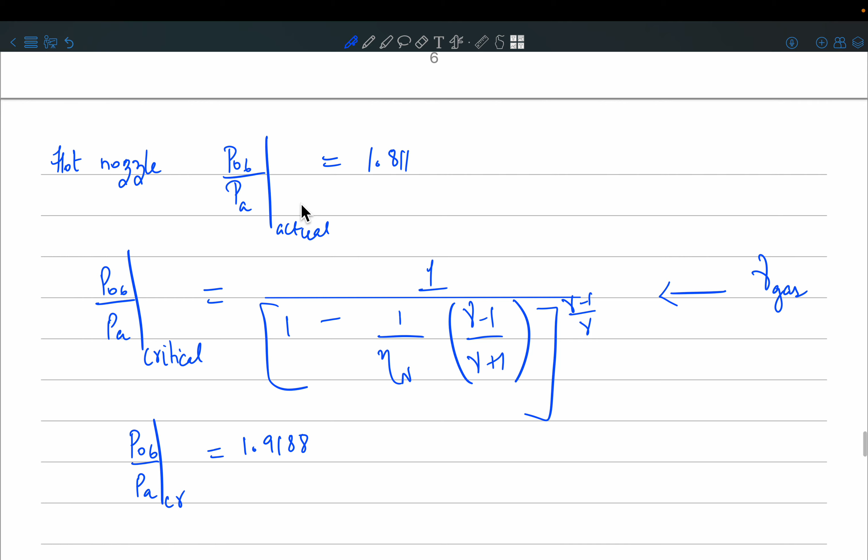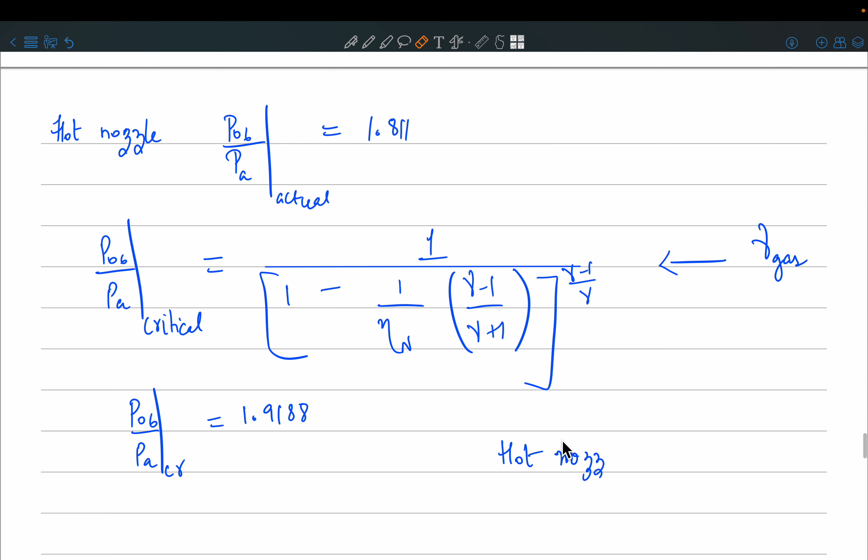Okay, and the nozzle efficiency remains the same - it is given the same for both hot and cold nozzles. So you can evaluate this, and P06 by PA critical turns out to be 1.9188. So what do you conclude now? Given the actual and the critical pressure ratios, what do you conclude? Yeah, there is no choke. So the hot nozzle - I'll just say no choke.

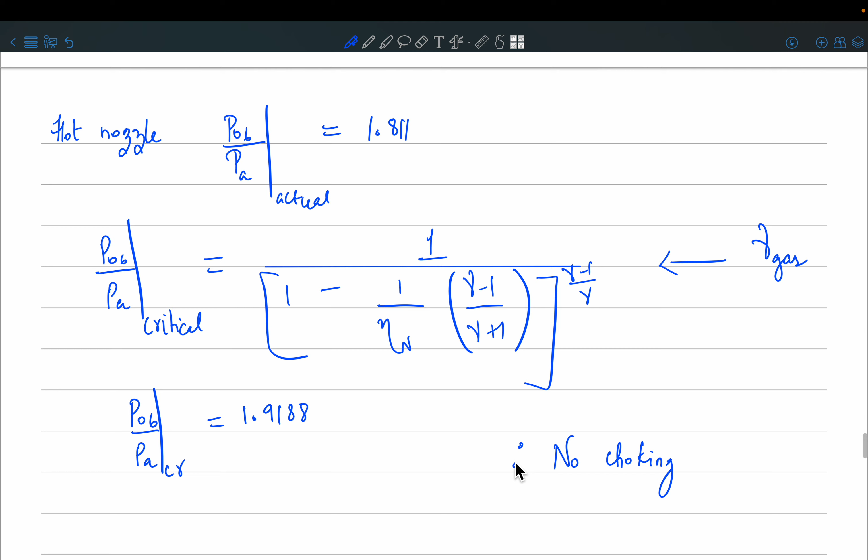Okay, so now because there is no choking, we can evaluate the velocity. For velocity, what do we need? We need the temperature at the exit of the nozzle. Let's call that T7. How do we find T7?

We just did this same thing for the cold flow, so you should be able to answer now. We have to find the temperature at the exit of the nozzle. How do we do it?

Yeah, exactly. So you use the definition of the nozzle efficiency, and you can write the expression as T06 minus eta nozzle into T06, 1 minus, here ideally you will have the temperature ratios T01 by T06, and that you can replace with the pressure ratio, which is P01 by P06 to the power gamma minus 1 by gamma, and be careful to use gamma gas over here.

Okay, so you can evaluate T7, and that turns out to be 739.817 Kelvin.

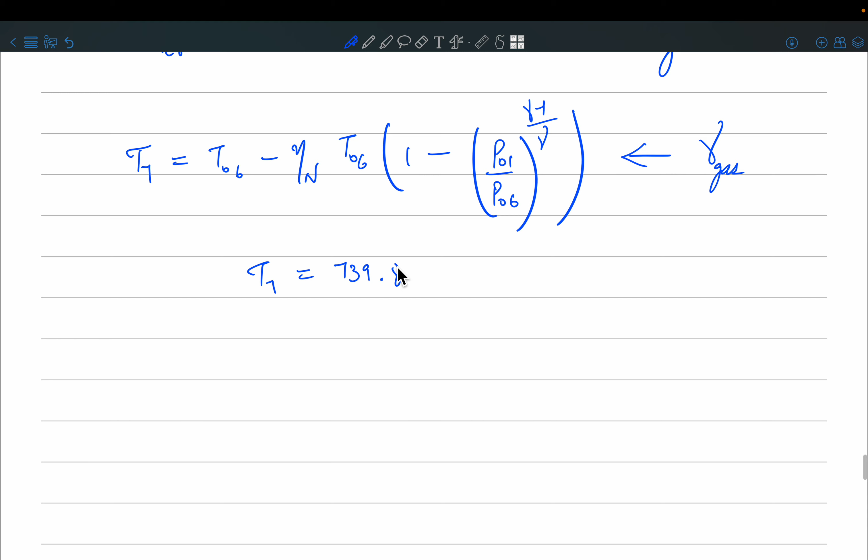Now that we have the value of this temperature, we can simply find the speed. I will call the speed C7, which is the hot flow speed. So C7 is 2 Cp gas into T06 minus T7, this whole to the power of half. Is this formula clear?

I hope this formula is clear, how you get it. So C7 is 505.99 meters per second.

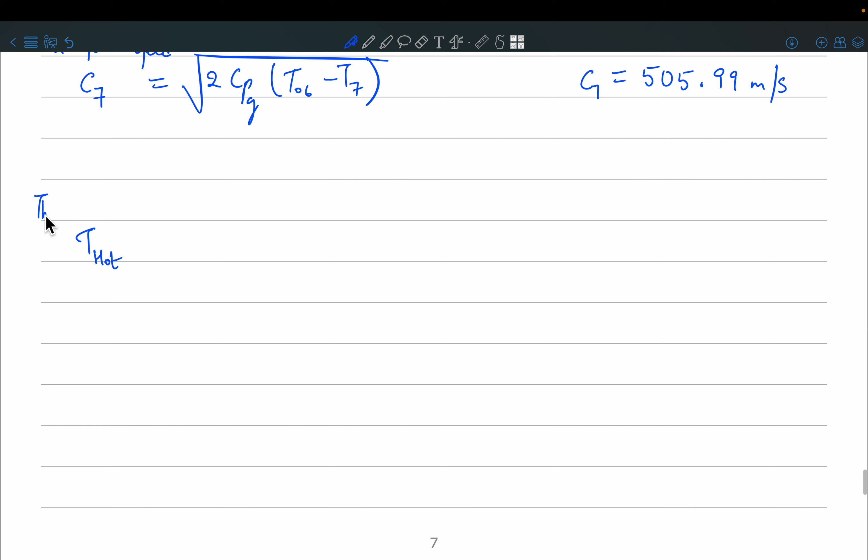Okay, so next we can evaluate the thrust. So what is the thrust? I'll write this as T1, this is thrust due to the hot nozzle. So how will you evaluate this?

What is the expression for thrust? So previously also we have done this. Yeah, so it's simply m dot h multiplied by C7, and m dot h is the total mass flow rate. So m dot total into 1 by (b plus 1), and then you have C7.

So if you just plug in all the values, the force turns out to be 17709.7 newtons.

Okay, so now what is the total thrust also you can find. So total thrust is just the thrust due to the cold flow plus thrust due to the hot flow, and that is approximately 67276.7 newtons. Is this what you are getting?

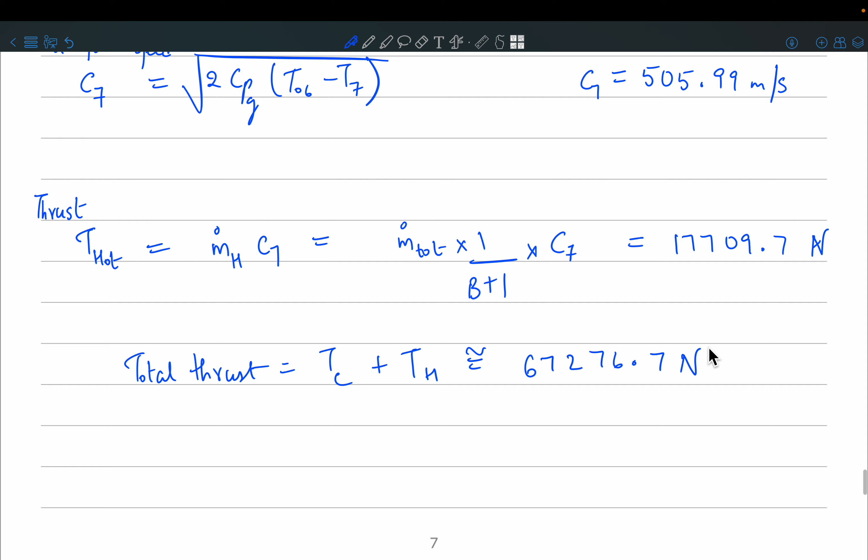Yeah, okay, you got this. Now if you go back to the question, the last thing they have asked you to evaluate is the specific fuel consumption, and they have also given you the fuel air ratio. So what is the specific fuel consumption then?

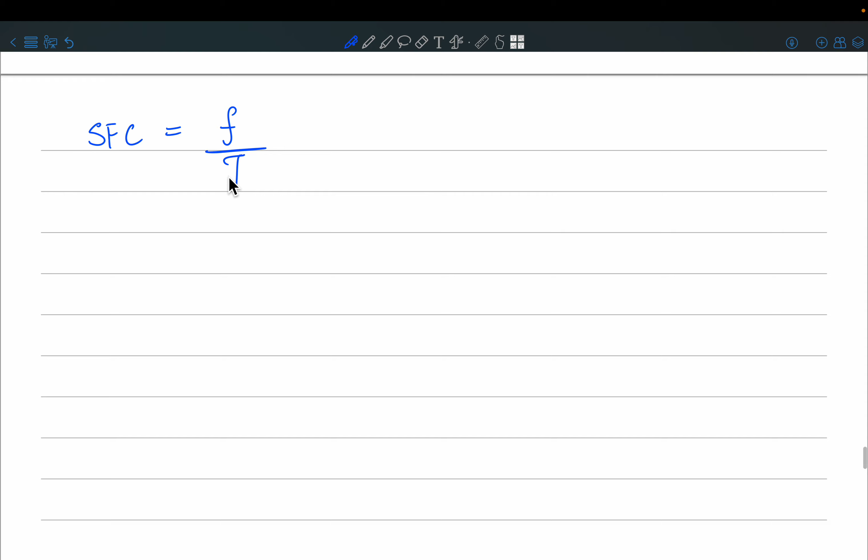Right, so SFC is nothing but fuel air ratio divided by the total thrust. Fuel air ratio is given to you as 0.0223, and we have found the total thrust also. This is T by m dot. What is SFC's actual definition? It is m dot F by thrust, isn't it?

Yeah, so then what m dot will you use over here? M dot total. So T by m dot total you can use, and SFC turns out to be 0.042.

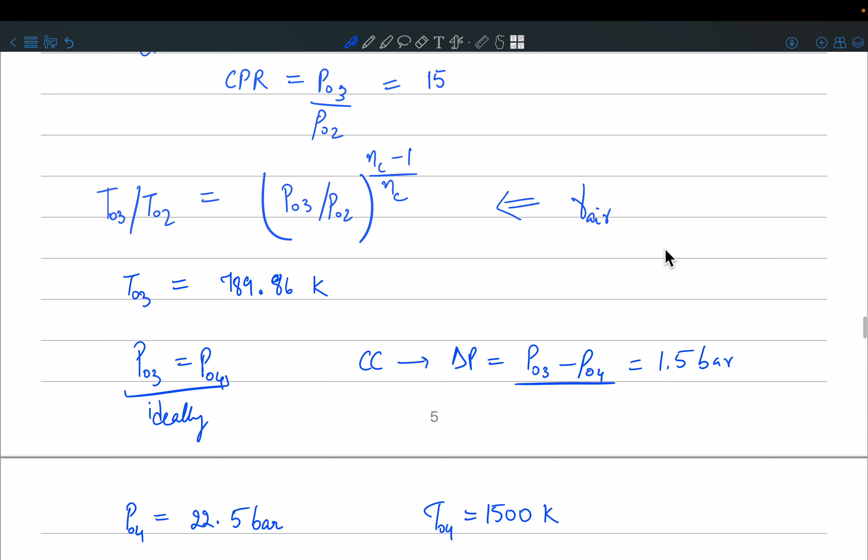Okay. Yes. Sorry, unit here is kilogram. Wait, it's there in the question. Yeah, it's kg per hour Newton.

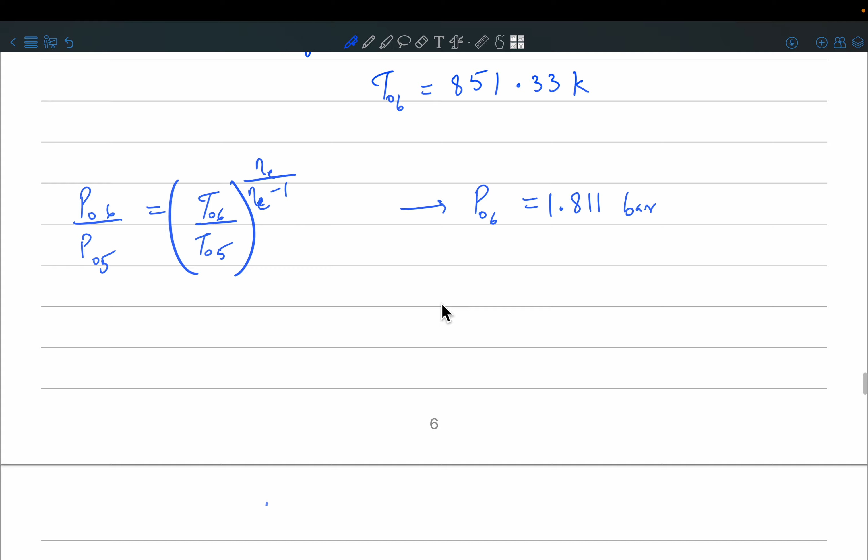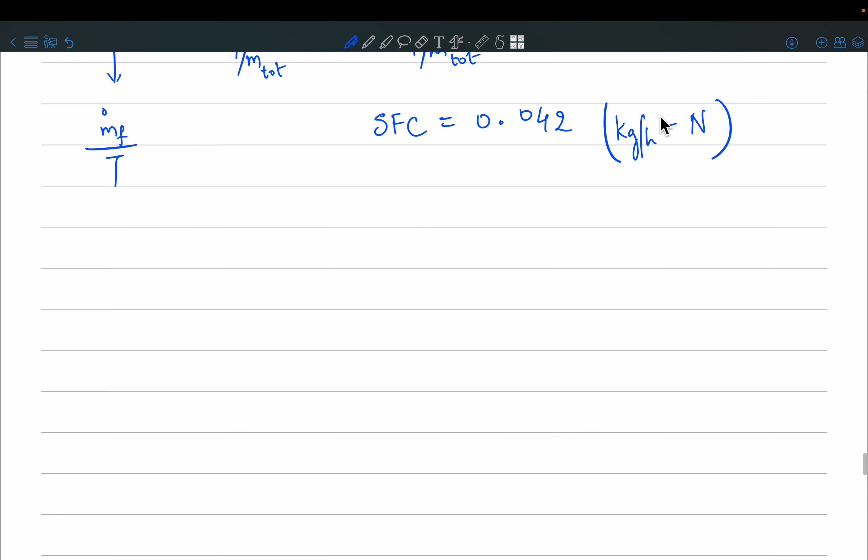Okay, then I guess the definition ideally, I mean, in the solution what I have is total, but ideally this should not be m dot total, it should be m dot h. So what if you plug in the value of m dot h and evaluate and tell me?

Okay, so there is another way you can just avoid all this confusion. Let's do that. So let us write this as m dot f by the thrust total. Now tell me, what is m dot f?

M dot f is fuel air ratio into m dot a. And what m dot a will you give over here? We'll say I'm burning the fuel in the combustion chamber, right? So in the combustion chamber, the amount of air that I get is actually m dot h. So I would write m dot f as f into m dot total by (b plus 1).

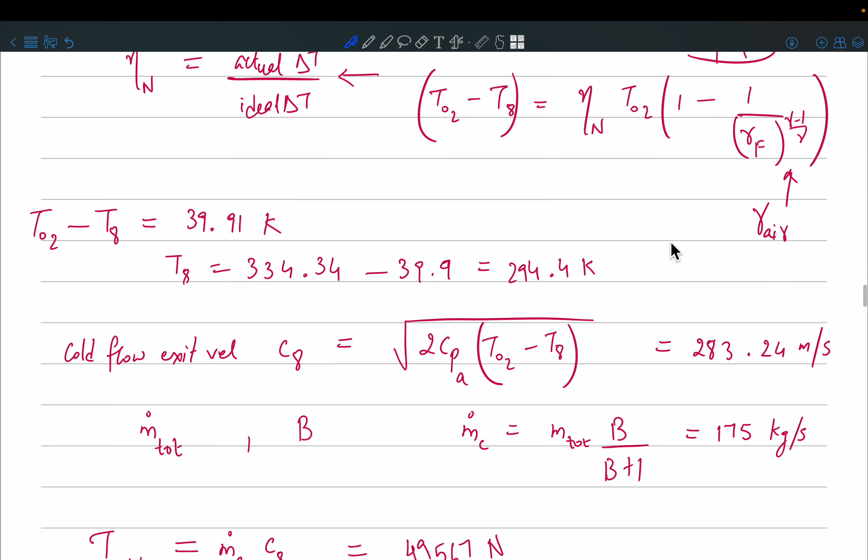No, what units are you using? So I guess the units are different. Have you seen this is kilogram per hour? Okay, so m dot total was given to you in what units? Kilogram per second, isn't it? Yeah, so then you should probably convert it to the right units and then compare.

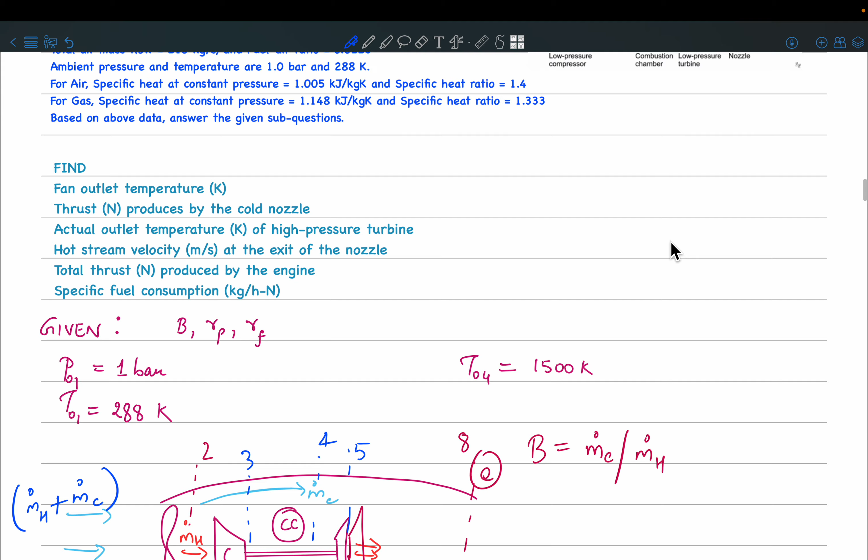You got it, right? And that is, you will have to use over here the mass flow rate of the hot flow, right? Yeah, right, so this is what even I think is correct. Okay, so you should pay attention to the units.